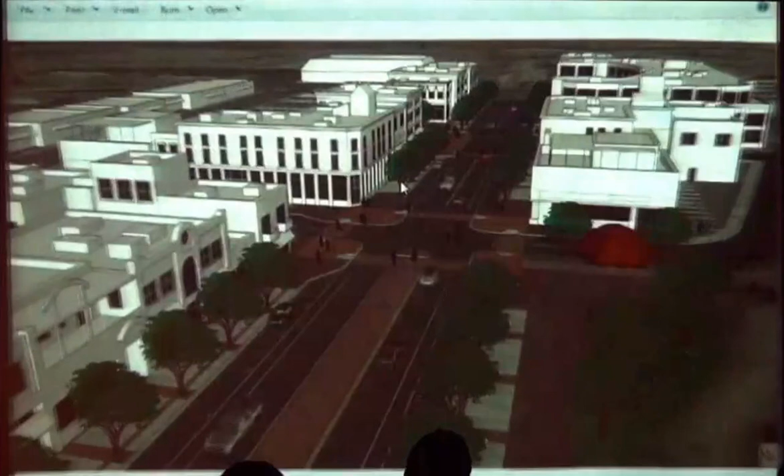Let's see if there's anything else here super relevant. Urban designy. Here are some different build-out scenarios in Tennessee. Here's trying to create a downtown core. Really, really simple graphics go a long way.

Finding your own graphic style is really important. You guys will become very intimate with the 3D warehouse in the not too distant future, and there's a lot of crap. You have to start to grab it and make your own library of parts that you like.

For example, none of these buildings existed. I stole all of these buildings, I think, from the 3D warehouse, but then I removed their textures, cleaned them up so that I could have this crisp graphic style for this. It wasn't about the buildings, it was about the arrangement of all of this stuff.

Maybe lastly - that one I think is not going to work. Anyway, that's probably enough.

Go ahead. How do you exactly navigate 3D warehouse? Because I was looking on it, but it's kind of overwhelming. So like, for example, when you had all those buildings, what did you exactly type into search?

When you're in search mode for stuff - trees, cars, buildings, whatever - use the web interface, don't do it via inside SketchUp. It's easier to just download stuff from there and then go back through it and clean it up. For the buildings, a mixed use building goes a long way, and you just have to be patient. There is a lot of stuff, and unfortunately people keep uploading more and more useless stuff every day.

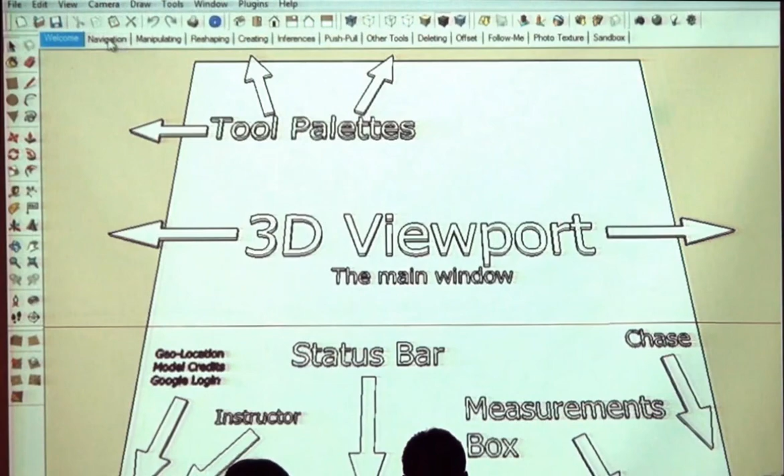So let's see, we're going to start to go through, and then obviously the menu bars at the top. We'll go through these sort of as needed, but they're pretty well organized. File is pretty basic stuff, printing and saving. Edit: cut, copy, paste, some hiding stuff. Views, generally kind of your graphic style. Camera stuff, drawing, editing, and then Windows.

We'll go through this a lot, but Windows is where—right there, where is it—Instructor lives in here. All of these little tiny tool palettes, like your materials, all of these things live there. So if a window looks sort of like this and you lost it somewhere, underneath Window is where they all live. And then Plugins and Help.

I know it's slightly different on the Mac and the PC, and I took some notes because they're actually really similar. The biggest difference is when I say Alt, Macs think Command, and Control equals Option. It's really consistent, but I don't have a Mac, and I'm not going to remember that stuff, but I will talk about it. Whenever you hold down a modifier key like Control or Alt, your cursor always changes to reflect it.

I couldn't even tell you what the modifier keys do, mostly because it's probably ingrained in my brain, but also because I just watch the cursor. I just hold down a couple different ones until I get the right cursor. Like if you're trying to select more stuff, you hold down the Shift key and your select cursor gets a little plus minus next to it. So it's really intuitive. Once again, don't write it down. Just remember that some of those modifier keys change your cursor icon, and it will tell you exactly what you need to know.

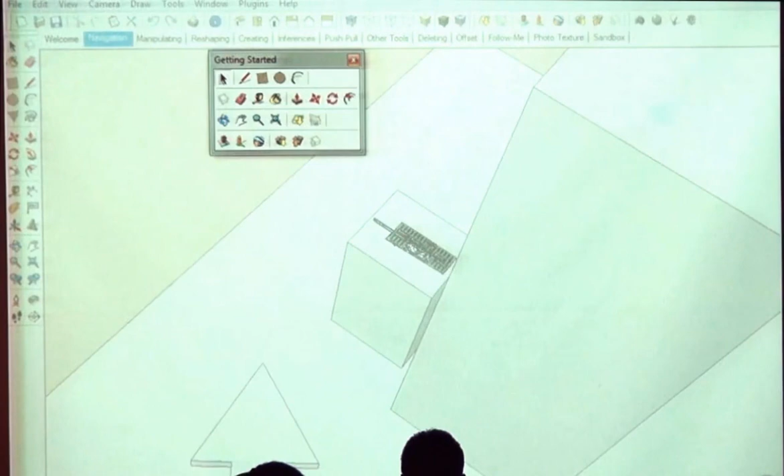Yeah, that's really awkward. SketchUp does crash. It's better than some things, I would say, in this world. We can talk later about auto-saving and backing up and stuff. Remind me. Yeah, okay, that's great.

So did everyone find that? Large tool set, just so that this is the full palette. And I'll turn off this other stuff so that we don't have to, styles. Okay, and that one's gone too, that sandbox.

Okay, so if you click, and then these guys, we haven't talked about that either. These are these scene tabs, and I set these up. We'll talk about them more in depth later, but right now these are chapters for this conversation, okay?

So if you guys all get to navigation, here is the magic. And I'm sure there's lots of non-mice in this room because you're on your lap, on a laptop, I get it, it's going to be difficult. First I'll just talk about the tools and I'll talk about why the mouse is so important. So those view tools live right here. They're this set of blue stuff.

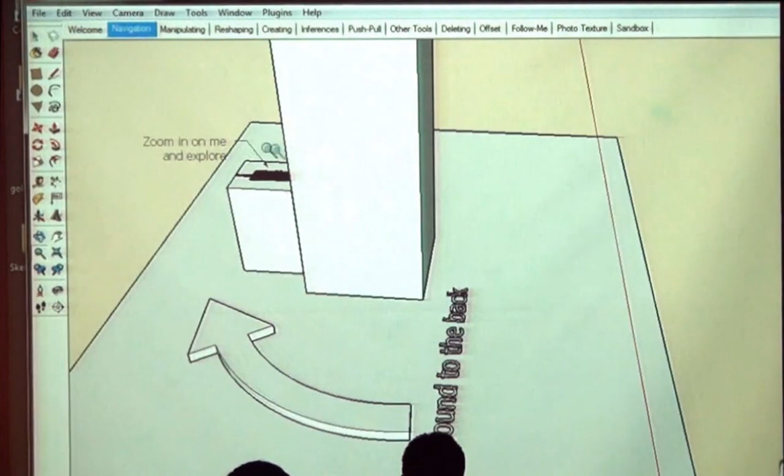The hand tool next to it, pan. H lets you pan. And lastly, the zoom, Z. The little magnifying glass, if you click and drag up and down, it zooms you in and out. So try to navigate yourself in back here, zoom in on me and explore.

For those of you with a mouse, it's all about your middle mouse button. Regardless of what tool you have, your middle mouse button, if you hold down the scroll wheel, turns your cursor into the orbit tool. If you scroll, it zooms you in and out. And if you hold down Shift and the middle mouse button, you get the pan tool. So just with the middle mouse button, you can do all three of those, basically. So try to get in here and move, just try to zoom down the street. Try to move through this little urban design-y project.

Am I killing you? Is everyone in the room really comfortable doing this already?

Okay, fair enough. Manipulating - you can just click on the scene tab and we'll get in here. So I have some cars, and these are all groups. We're going to first talk about just making things simple and being able to select and move groups.

Select tool, shortcut is the space bar. If you select something like this red car, you can then choose the move tool, which is this guy here, or press M to get it. Just try to move it around a couple spaces.

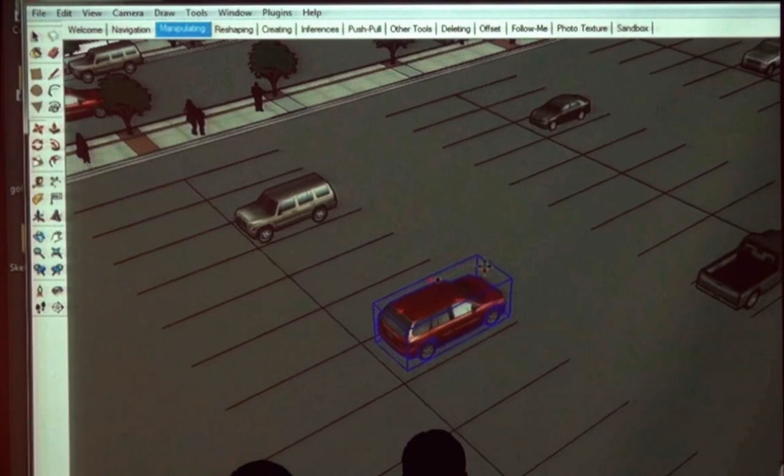One of the nice things about groups is if you have a group selected, you can easily rotate them with these little red crosshairs that pop up on its bounding box. Scale tool stretches it uniformly. Okay, you guys know this apparently.

Moving along - reshaping. As a rule of thumb, something I've learned over time, and I don't know if many other big SketchUp dorks would argue with me: it's generally easier to recreate something than to modify something. So if this is just an ungrouped blob of red stuff...

You can select faces and move these around as you like, but generally speaking, this is a really simple shape. It's easier just to delete some of the parts that aren't where you want them and just draw in new lines where you do.

Just kind of let that float at the back of your brain while you work on larger projects.

One of the things worth noting with this geometry that's loose, not in a group, is if you're trying to modify individual faces, sometimes if you're trying to move something and it won't move - like if I want to move this plane up along blue - I can't, even if I press the up arrow, well, I guess if I force it.

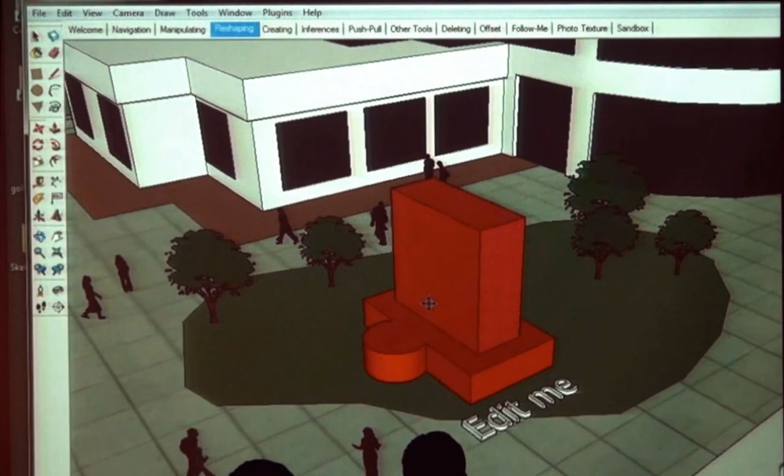You have to either press the up arrow to force lock my axes into the blue one, or do something called auto folding, which is Alt. If you look at the very bottom of your screen with the Move tool active, there's this 'Alt toggles auto folding.' What SketchUp's trying to do is if I'm trying to move this surface up, it would force a lot of other surfaces to get bent, to get folded, and SketchUp thinks, why would you want to do that? You've already modeled something nice.

Why are you trying to bend it? That's the trick - you have to force it into an axis with the arrow keys. For those who don't know, the arrow keys are a way of automatically snapping and locking your motion, your direction, into one of the red, green, or blue axes.

Okay, so manipulating - you know how to rotate. Everyone is comfortable rotating stuff. Hands - this is for you. Okay, there were enough, I guess.

Creating - so this is where I'm going to start to beat this stuff into your head, whether you like it or not. Now click on the Creating tab. I cannot harp on this enough: the most powerful thing, and sometimes frustrating thing, about SketchUp is the ability to snap intelligently, or to let SketchUp help you infer right angles generally.

So what I'd like you to do is make a cube from scratch. I gave you two edges of it, and I'd like you to go through the process of finishing the bottom part, so you have a flat plane, and then making it 3D, all by hand, not using push-pull. Then go up and make sure you're using those dotted inference lines.

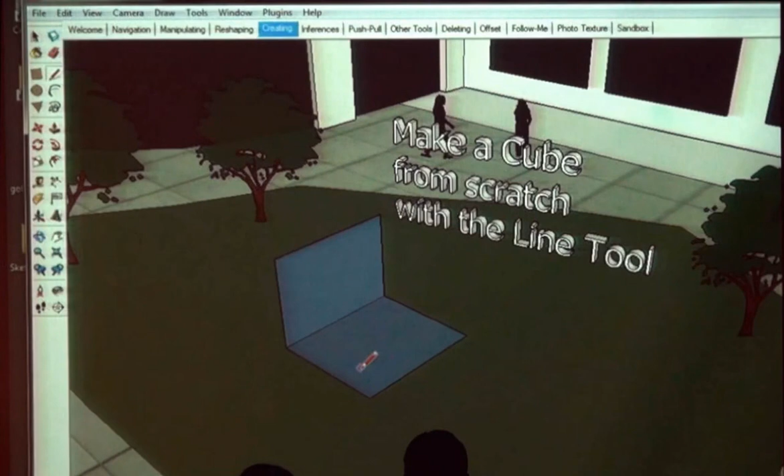There are a couple methods - okay, excellent question. There are a couple methods, and these are subtleties that relate to you as a user. If just using my mouse and the line tool, if I start making this line and it snaps to red, and I start moving it along red, it will automatically snap and put up that little dotted green line, showing that it's inferring that distance. The other part is the shift thing, and I use shift.

I don't do that - I don't have time to wait for SketchUp to figure out what it's locking to. What I do is, as soon as I get my line snap, as soon as it snaps to the red axis, I hold down shift - let me move that up here so you can see better in the back. It gets thick. When you hold down shift, that line gets thick, and it constrains it, which is the SketchUp lingo - it constrains it to the red axis.

So wherever I move my cursor, it's only going to be making that line along the red axis. The trick here is that if I move my cursor over the next endpoint I want to align with, I can force my current red line to be that same length, without thinking or waiting for SketchUp to do the little dotted things. So then I click on this endpoint and just close it in.

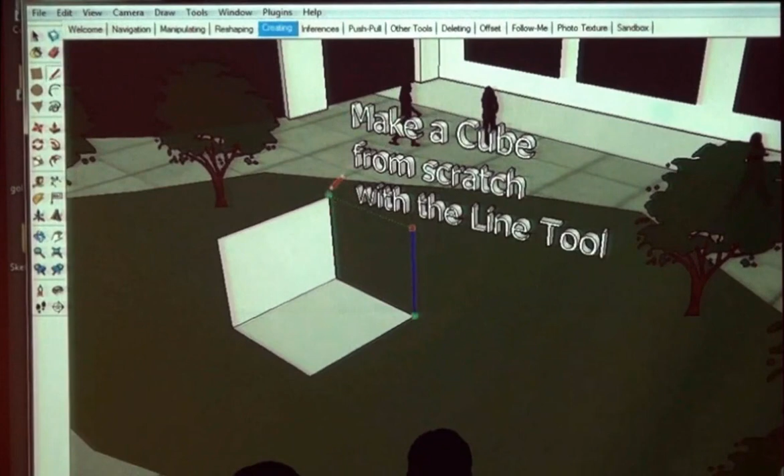So I start making a blue line, hold down shift, and then hover over this first vertical leg I made. Then click, let go of shift, and close it in. Click, find blue, hold down shift, hover over the point I want to align with, click, let go of shift. That's the way I would recommend it, but you don't actually have to use the shift key. SketchUp has gotten a lot better in version 8 about guessing without using shift.

So anyway, get yourselves a box made. The inference thing is so huge. Please raise your hand if this is not crystal clear. Okay, moving along.

I'm just not getting it lined up exactly. I should use this shift tool. The shift thing really helps. The biggest blight of SketchUp is when things are close and not quite right, because those subtle shifts are hard for us to see, but they make the model not work at all.

So if you're having issues, other people are too, so why don't you guys seriously make 10 cubes in this time until I get back up here.

There is no way I'm going to get in here, is there? Oh my gosh, I'm off by a whole row here. Okay, maybe this isn't going to work.

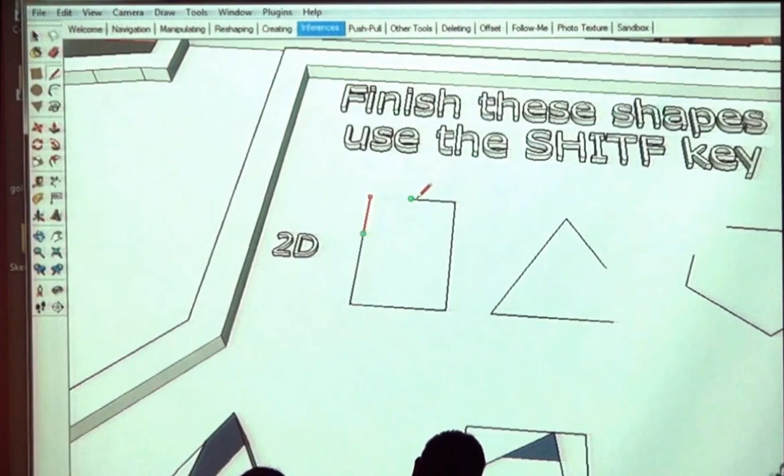For the triangle, someone just asked about parallel. There are a couple for the triangle. For the rectangle, it's easy because we're on red and green. For the triangle though, we have to find some magic point here in the middle where these two lines intersect, and here's how you go about it: magenta is the color that represents both parallel and perpendicular. They figure they're 90 degrees apart. You should be able to tell which one's which.

If you click on this endpoint, what I like to do is backtrack a little bit and hover over this line segment, and it usually says 'on edge.' At this point, you can try to extend out a line, and it should be magenta. Hold down Shift, then hover over the line segment, not the endpoint, somewhere on the line. If you hover over the endpoint, it'll try to make a right angle. Instead, hover over the line and say you want this line to intersect the other line. Then hover over it and click, let go of Shift, and click again. It doesn't look like it worked, but there it is, I did get closed in, it's just the other side showing.

Same with this one: endpoint, backtrack, magenta, hold down Shift, hover over the line segment. Then try these 3D shapes.

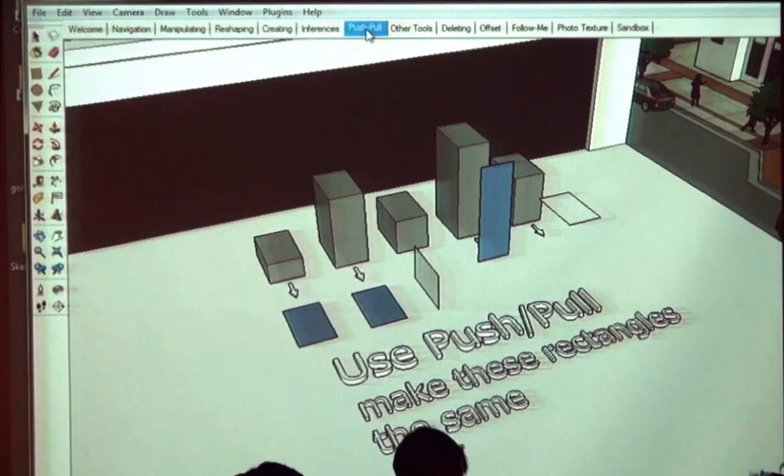So push-pull, of course you guys know this much about push-pull, that you use it to make flat faces into a three-dimensional shape. When you select it, P is the shortcut.

When you hover over a flat surface, it will auto-select it and hatch it for you. What I wanted you to do is just practice the same kind of thing, using the inference lingo, except you don't actually have to hold down Shift for this, which is nice, to make the same shaped cube using those starting points.

So this guy, if you click and then move your cursor over any of these endpoints or these lines, it will extrude it to the same height. Now it's just getting you comfortable using other geometry to influence the height and distance of the stuff you're building right now.

So then from left to right, front to back, I actually have no idea where I drew that because you can't really do anything. I guess you could use this one. That would work. Going down.

That was supposed to be pretty quick, but it's different, because there aren't any axes, pushing and pulling is a one-dimensional thing. You can only go one direction, perpendicular to that surface.

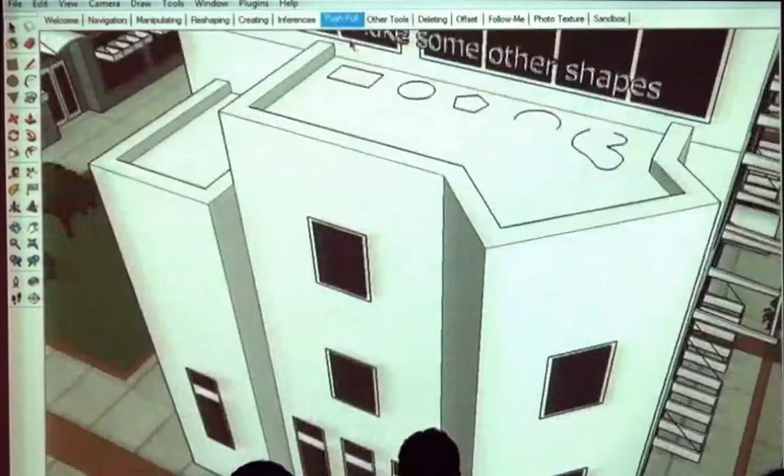Sorry, I lied. The one other thing I wanted to make you aware of, if you didn't know, is push-pull has one of its modifier keys, the control key. Once again, who cares what control is? Shift, Alt, Control—one of these is going to do something.

If I hold down—oops, P, I just freaked it out. The control key will toggle a little plus sign next to my cursor. And it will say at the bottom, Control, toggle, create new surface.

So what the little plus key with push-pull does is it leaves a division in there for you. It creates a new face rather than just moving that existing face. And this is useful for saving you from having to draw new lines generally.

Did that make sense? Oh, navigating, manipulating. Okay, other tools. Frankly, these are just time savers.

The arc is useful, I guess, because it's pretty hard to draw an arc segment by segment. But these make some other shapes, just these other guys here. Rectangle goes corner to corner. Circles are circles, they go center out. Sorry, for you CAD junkies, there's no 3-point circles or anything.

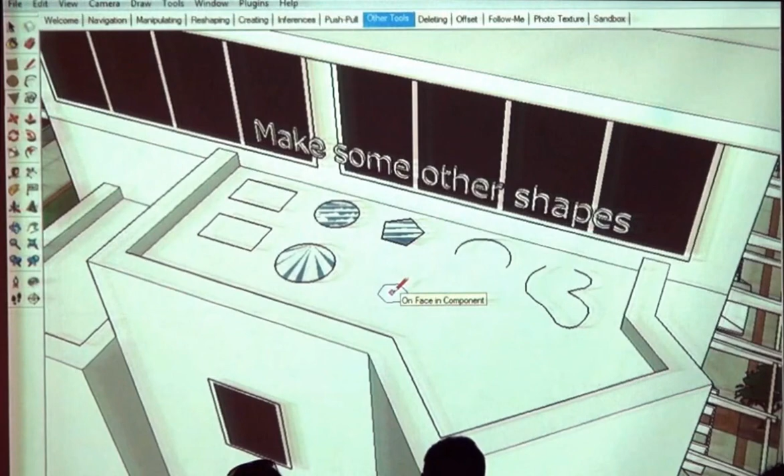Polygons, you can choose the sides. So the one thing you can do is as soon as you choose the tool, you can type in a number and hit enter, and it'll change the number of sides of this polygon. Right now it's on 6. I could type in a 3 and hit enter and make a triangle.

Arc tool: endpoint, endpoint, and the amount of deflection. And then freehand lets you draw freehand stuff. It's pretty tough to do anything really useful with the freehand tool other than trace contours.

It's not bad for sometimes you want really rough shapes or it doesn't matter and you're just doing it quick, but the freehand tool gets very little love from me. If I'm really making something that's semi-curvilinear, I'll just make a series of arcs if it matters.

Okay, questions? Moving along. Deleting—we haven't talked about selecting, and I just want to make sure that I cover all of the ways and the differences in the methods.

So if you single click on something, you get that face or that edge. If you double click, you'll get that face and all of its edges. Or if I double click on an edge, I'll get that edge and the faces it's separating. If I triple click, I can get all of the faces that are connected or touching it all.

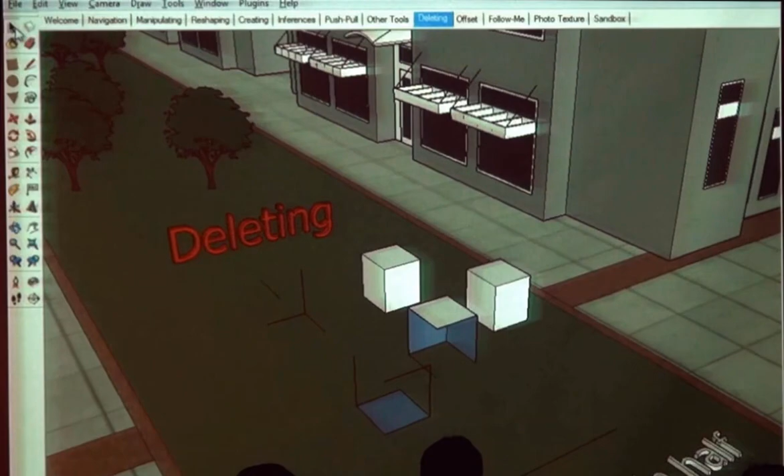Let's go to offset. Make a balcony - offset's really easy. It works pretty similar to push-pull. The shortcut is F for offset.

What about breaking a line? Good point, let's go back to deleting. One of the frustrating things is there's not a way to break a line in half - there's no break tool. The only way to make a line segment shorter is to connect a line maybe to the middle, snap to the midpoint (cyan), connect a line segment, then choose the eraser and erase the segments you don't want. There's no break tool, that's just how you have to do it, and it's not necessarily intuitive.

Okay, so offset - F is the offset tool. Is everyone familiar with offset? I heard one no, so there's probably a couple more. Offset works similar to push-pull in that it auto-selects whatever you hover over. If I choose F and hover over this plane, it'll hatch it, and it puts a little dot on the nearest edge to your cursor - that's going to be its reference point, indicating we're going to measure an offset distance from that point to your cursor. If you click, you can start to drag in from that location or out. In this case we want to go in.

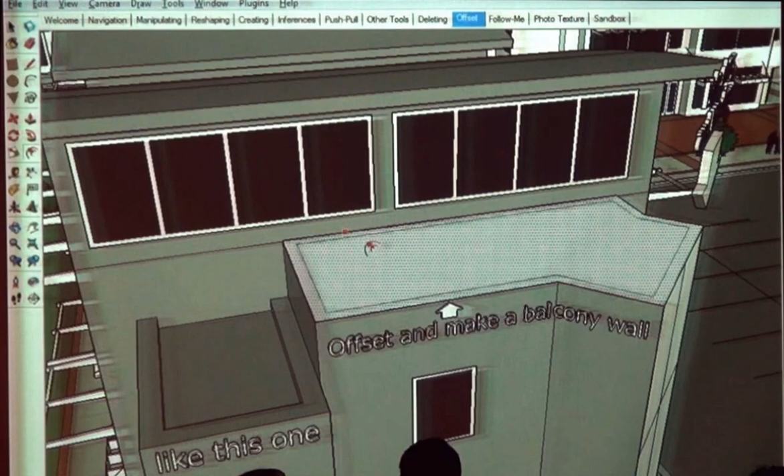Like with any of SketchUp's tools, do you know how to do specific distances yet? You just type a distance and hit enter midway through any operation. So in this case, we're going to offset this in, let's say, 2 feet - 2 apostrophe, enter. I think feet are the default unit. Then P for push-pull to either push this down or pull the other part up.

If we turn the corner here, we can make some doors and windows - this was a little exercise to use F to offset some different parts. One of the nice things with both push-pull and offset: if you double-click on a surface, it will repeat the last amount you just did, which is a huge time saver. If you're making building footprints popped up to 15 feet as context buildings, do one at 15 feet and then double-click on the rest, and they'll pop up to that same height. Same thing with offset.

How long is class, by the way? Typically till 9, but we can go later. Till 9? I'd say, I mean, I'm thinking half past 9:30. Oh okay, that's what I thought. Maybe another half an hour? No, I was expecting till 11. Oh wow, okay, anyway, we'll just keep going.

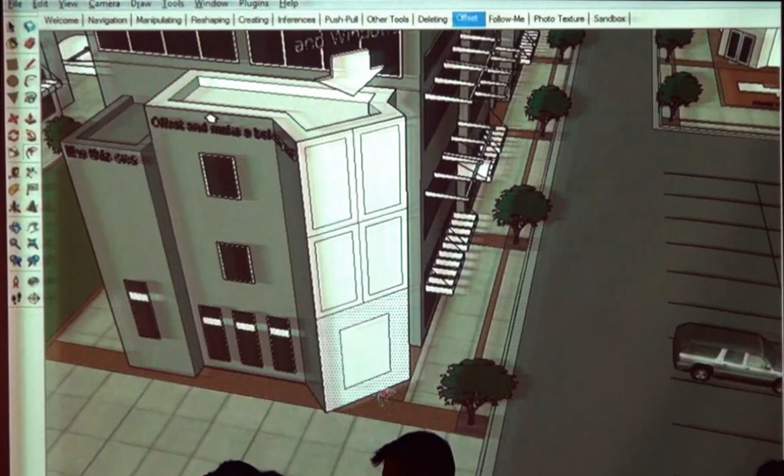Okay, offset and double-clicking all makes sense. Okay, so let's do the next one.

Follow me. Follow me is really sexy - what it does is let you sort of extrude, like use push-pull along a path. There are two methods. This is the follow-me button, double click, or excuse me, this one right here, right below push-pull.

So there are two ways. You can either select the Follow Me tool, click on what I would call your profile surface, the one that you're going to be pushing and pulling around, and then you can just drag it along a path.

You can do really sexy, complicated things like a planter without a lot of effort. This is important because it's literally impossible to join these arced parts at these 3D angles. It's a huge thing.

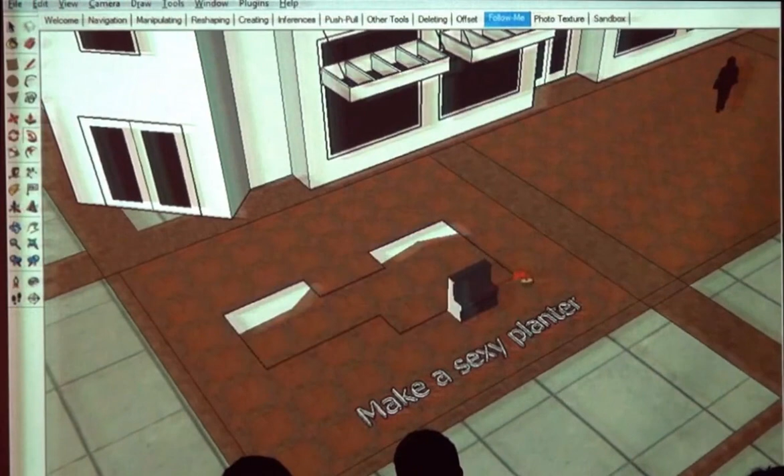Okay, so the click and drag method works, and you just kind of have to be patient with it. But this is not the recommended method to do it, because you end up fighting at the end, and then all of a sudden you are doing weird things like, what's this? How did I even get that? And you're never going to fix that.

So here is how you should do it. It's a 2-step thing. You select the path, and then you choose the Follow Me tool, and then you click on your profile. So if you double-click on this bottom part, on the base, on the path, and then deselect the surface, then you just have the edges. Then click on the Follow Me tool, and then click on the surface profile. It just does it for you.

When you did the windows, did you do it that way where you double-clicked to get the face and then deselected the face to get all 4 corners, or did you select each one? I did them individually. So what I did is I just offset this one and then double-clicked, and it repeated that same amount.

Because Follow Me is so sexy, you get it twice.

I got a question. How come sometimes the shapes turn blue and how come sometimes they turn white? Okay, great question.

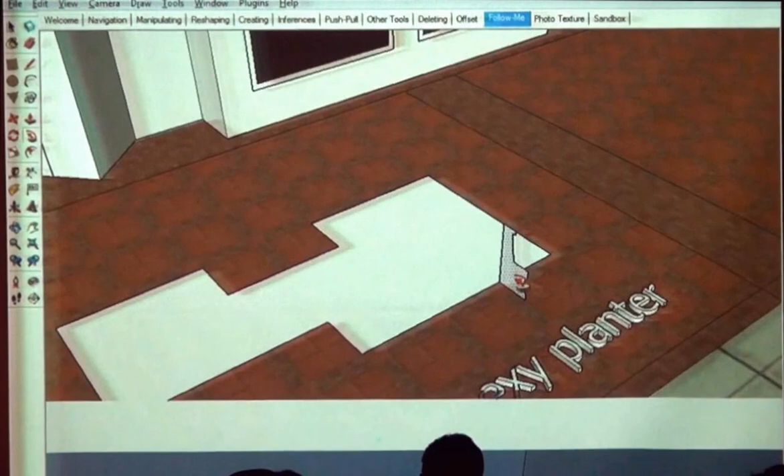Okay, so Follow Me again. So the path: you double click to select this whole surface, and then shift click to deselect the surface, so then you just have the outside path. Then choose the Follow Me tool, and click on the surface of that profile, and it will drag it around for you. Is there any way to combat that camera cutting off?

Yeah, and this didn't happen quite so much at home. This is an effect called frustum clipping, and it happens in geographically large models. Because this little tiny thing has all of this other junk around it, SketchUp needs to be able to think about all of this stuff and keep everything ordered when it renders it front to back. So what it does is it tries to cheat and push the first point you can see farther away from your nose.

The only way to solve it is to make your model not so geographically large. It's a proportional relationship to how big your model is and how close you're trying to get into something. It is, in my opinion, one of SketchUp's only real big flaws, that there's no way to manually control that.

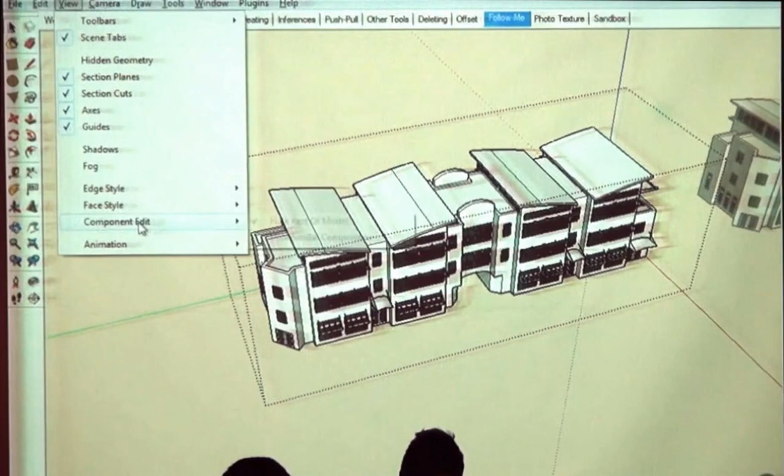Sometimes when it's really bad, if you go into a group and hide the rest of the model... where's hide at? Or show, where is it? View. Hide rest of model, and hide similar components. So you're just looking at this one individual group, and then go zoom extents, which is this button here. It'll kind of bring things back and clean up that relationship a little bit.

So then when you go back out into the real world, you can sometimes get in a little bit closer, but it's a drawback, it really is. When you're doing big landscape projects and you maybe want to have some views of the mountains in the background, don't bring them in from Google Earth, because it will definitely compromise your ability to get in close for the stuff that matters. You're going to have to fake it, put in some kind of wallpaper in the background or something.

Okay, did Follow Me work out? Okay, photo texturing. So let me quickly go through this before the rubber meets the road here and make sure I haven't omitted anything huge.

Okay, last thing, let's go back to Follow Me. I do want to talk about groups and components. So in this model, in general, I have a few things - I built this for a project, so it's okay, it was a little quick. Groups and components - the difference between groups and components. You've heard both these terms, I assume, or at least heard of them.

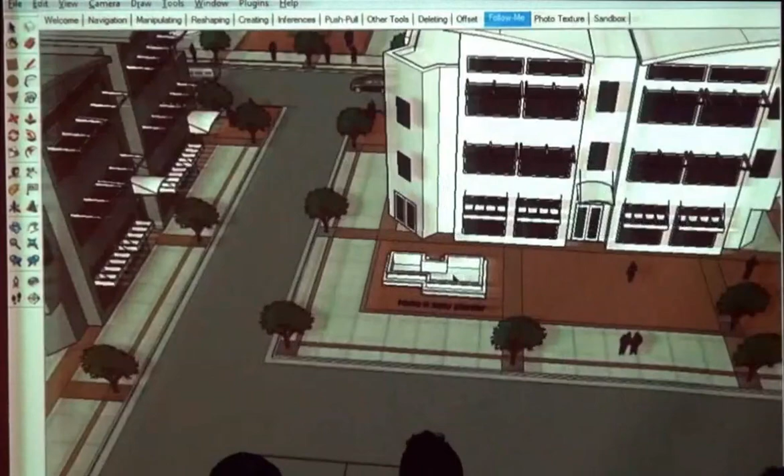So let's talk about making a group. Let's go back to our planter and pull that up. Oh, this effect here - just so you have a word for it, it's called Z-fighting. This plane of the bottom of the planter is in the exact same place as this ground plane, and SketchUp just can't decide which one to draw first. Anyway, let's pull that up.

To make a group, since there's nothing else attached to our planter, we can just triple click on it or drag one big bounding box around it, then right click - let me move this up a little bit. Right click, and there are two options: make group and make component. They look a little bit better this way. If you choose make group, you're done. It puts a little bounding box around it, and you can interact with it as one big whole part. All you have to do is single click on it.

To edit groups, let's say you need to put more or less dirt in this planter. You can double click on it - that's the easiest way by far. Then you get inside, and you can actually manipulate the individual parts of it. Then either hit escape if you're zoomed in really close, or just click outside the dotted bounding lines, and you'll go back out to normal space. Is that all crystal clear?

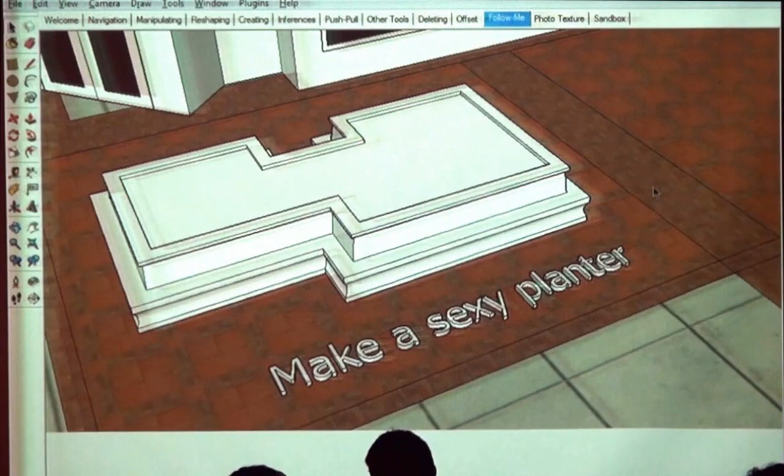Groups are easy, and you can have groups within groups within groups, and it keeps the hierarchy. It's the way you should model everything - the way you should organize your model. I typically have only one thing ungrouped at a time, the one thing I'm working on. As soon as I finish it, I group it and move on to something else. I cannot harp on that enough.

Okay, let me undo so we get back here to its ungrouped state. Let's pretend now that we know we're going to have a whole bunch of planters, and they're going to be identical to this one. Maybe we don't know exactly what the materials are going to be yet, but we know at least the locations of them, so we can use this as kind of a placeholder to be thinking about it. On the back end, when we do know what materials this is going to have, we can just do it to one single model, and it'll replicate those changes everywhere.

So once again, triple click on it to get it all selected - make sure it's not a group anymore if you undo a couple times. Right click, and right next to it is make component. This is the defining part that's a little bit different - you get this window to pop up. We're going to ignore some of this stuff for now. The only thing that's really important is that this bottom box is checked: replace selection with component. You can give it a name, and it's a good idea to name this stuff - it'll help you find things that are lost later on. Planter.

And then hit create. Same thing, it's a group, you move it around, it looks and feels and walks like a group. You double click to get into it. But here's where the magic is.

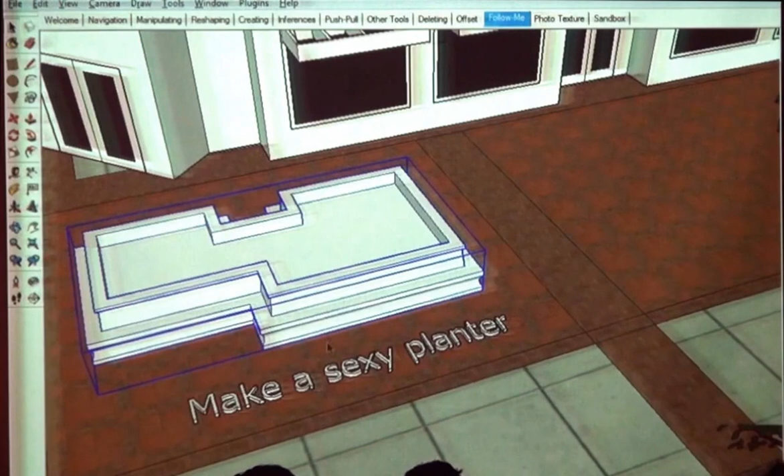So here's how you do it. You have your group selected. Choose your move tool, M, modifier key. At the bottom you can see it'll say Control equals toggle copy. Who cares what button it is? I'm going to press the modifier keys until I figure out which one it is. You get a little plus next to your move icon. Now you're in not just move mode, you're in copy mode.

And if you use it just like you would, I'm going to slide it over here along the green axis. This is how you make a copy. This is, in fact, the only way you should make copies. You should not use copy and paste. Copying and pasting has its place in SketchUp, but it's not for this, it's not for duplicating.

And if you hold down Shift, it'll slide it along like a red or green axis, it'll lock it in exactly the same way. So you start the copy with Control, then you find your axis, and then hold down Shift.

Yeah, so let me guess, so you did this, and then there you go, this is where you got. So you just have to find one of those axes, is all.

Or better in this case, if I were to select this, move, copy, if I were to grab one of these, snap to one of these points at the bottom, then I would be dragging around the bottom point, and it would then snap to the ground plane.

Okay, alright, I was actually found out this morning. Can you use this tool then to array? Yes, I didn't want to go there, but we can talk about arrays. It's just a huge time sink. So arrays are cool, so here's the magic.

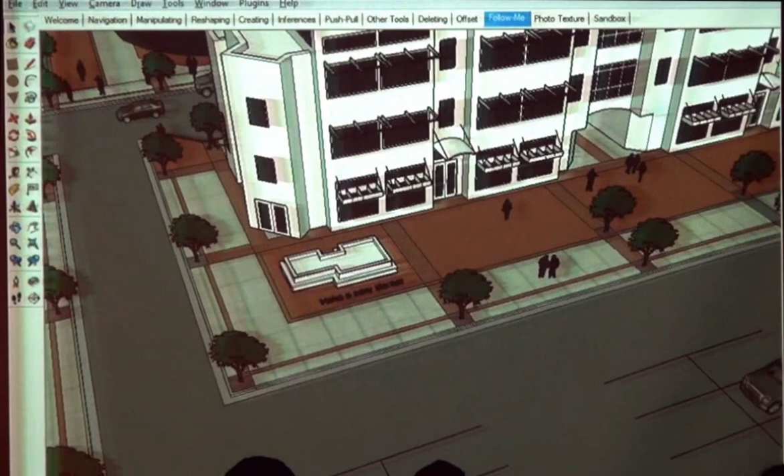So here we have, in fact, let's grab a tree. Here's the copy and paste thing. Copying and pasting is good to move an object from inside a group to outside of a group, or from inside one SketchUp model to another. That's its use. So I'm going to copy this tree, and then come out here and paste it. Okay, so I have this tree. You guys could use the planter or whatever, I just grabbed the tree.

So let me talk about this in concept first. Hear my words, watch my motions, and then we'll walk through it, because it's going to take us 3 iterations to get it, just because there's a lot of button pushing at specific times.

So I have a tree selected. I grab my move tool, and I make one copy, just like we talked about doing before. Then I do some keystroking. I press the asterisk key, which is Shift 8, and then a number. So asterisk 5, and then hit enter. And what it does is it repeats that same offset, in this case 4 more times. It counts the first one.

Okay, so let's step through this. Grab your planter or your tree or whatever you just made, so you have it selected. Choose your move tool, M, and make one copy. I'm going to press the control key to get my little plus. I'm going to click, and drag, and then click again, and I've finished my copy. My new tree is selected.

It's done, we've completed that operation. But before you rotate your view or do anything else or change tools, you need to then type asterisk and a number and hit enter. So asterisk 6, enter.

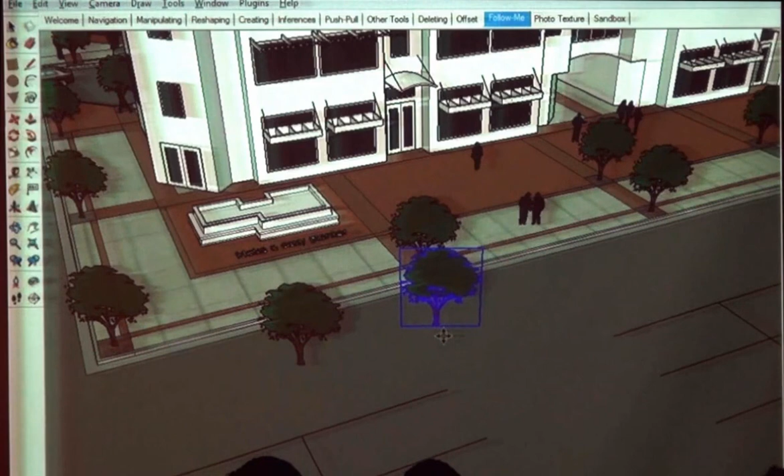Okay, 10 more of you got it. So, undo, well, I'll step through this again. Select my tree, choose my move tool, toggle on copy mode. Click, move it over, and click again. I've finished copying. Then type in Shift 8 for the asterisk and a number, and then enter.

Don't type 10,000, you'll crash SketchUp. It'll try - it will, and every time it crashes SketchUp, or brings it to its knees, and you have to wait 10 minutes. Okay, one more time.

Select your first shape, move tool, toggle on copy mode, click, drag, and click so you've finished the copy. Then type in asterisk. You do not need to click in that little measurement bar at the bottom. If that hasn't been said before, you never need to click there. Numbers you type automatically go there. So asterisk 5, and then press enter.

So the concept is make a copy, then type in the asterisk and some number. There's a converse of this where you don't know, you just want to evenly space some things. So I have no idea what these tree offsets here are, for example. I don't know the distance amount, but if I make a copy to the far location, instead of using the asterisk, I use the divide by, the forward slash, the one with the question mark, forward slash, I think it's 4.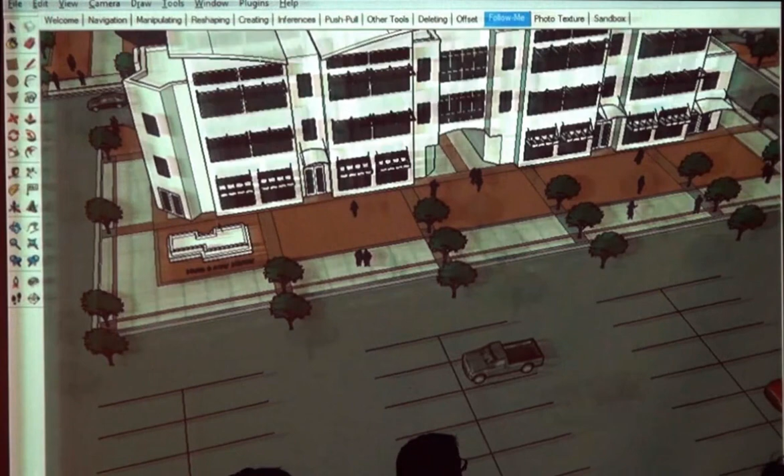At the end of this, there's a couple of links I can maybe point you towards. Okay, so copying in arrays, groups. Oh, did I finish that? We got sidetracked on the groups thing. So if you make it, did we do this? You make a group, and then you can go into either one of these and edit it. So if I go into this one, and if we go into this one, we'll paint on, we'll make some gray dirt because it's in these days.

It's chic. It does both. And it would not have done that if there were groups.

The one thing that's tough to distinguish in this universe is what's a group and what's a component. I have tons of things in here. Is this a group or is this a component? Are these trees groups or components? This building looks just like this one. Maybe they're different. Maybe they're, who knows?

The one way that I know to find out easily is if you right-click on something, anything on the background even, you get what's called the contextual menu. The very top thing is called entity info, and if you select something, it'll tell you info about that entity. So this building is a group. This planter I just made is a group, and it'll tell you how many there are and its name. These trees, it turns out, are components also. These cars, on the other hand, are actually groups, and it says that.

So that's the quickest thing. And this, once again, if your right click doesn't work because you're crazy, underneath window, same thing, entity info. Okay.

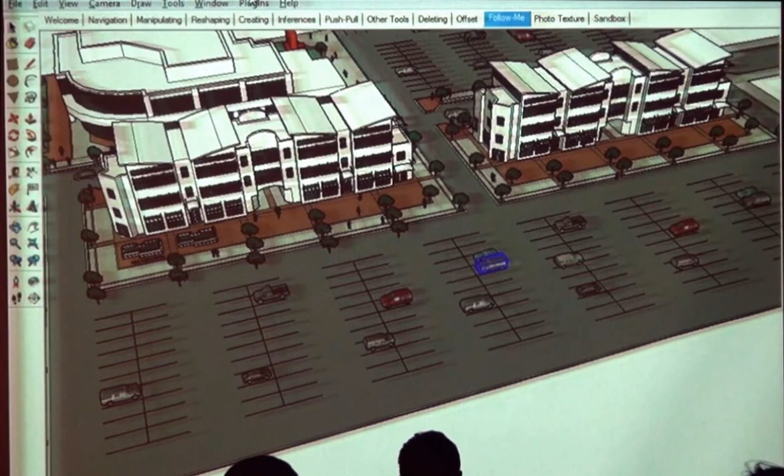So just quickly about windows - if you go underneath Window, you will find Components, and in here there's a pull-down menu with a whole bunch of options, like landscape architecture. If you're online, it'll pull this stuff out of the 3D Warehouse.

You can pull in little doors and people - it's just silly to build this kind of reference material when you can find it. Once again, I'll come back to the 3D Warehouse in more depth a little later.

Okay, so let's move on to photo texture. We're going to definitely shift gears and get into maybe the more fun stuff, more visually appealing stuff. So far, do you have any questions?

Okay, so here is - I brought in, I think this is the project site you guys are going to be working on, right? The gardens. And I traced off the air photo pretty crudely, these pair of greenhouses.

So the goal here is, also in that zip file I have 3 greenhouse textures or images that are going to become textures. We're going to bring these in, stretch them to this surface so that we can photo map our building.

No, these are ones Jay sent me. They're actually of that greenhouse.

One of the things - this is a good caveat - Jay sent me these right from his camera. They were like 5 megs a pop. Insane, insane - if you start to do that for a whole bunch of buildings, you will develop an insanely huge file quickly. I scaled these down.

Remember this number, 1024. It's a little abstract, it's a power of 2. It's a good texture size that you should think of as your maximum width and height. Don't bring in textures bigger than that unless it's going to be one of a kind, like your base map. For buildings, people, cars, and trees, 1024 is your absolute maximum, and you should generally make things smaller than that. That is your rule of thumb - 1024 pixels, sorry.

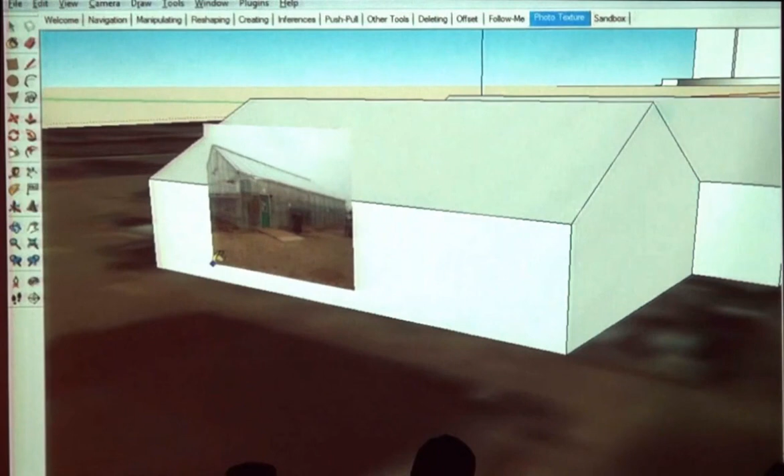We're just going to click - don't try to fill up the space. In fact, it would be better if you kind of intentionally leave it small. Don't use the endpoints - this sounds silly, but just do it right in the middle of the surface. So I'm going to click here and maybe click here, and I get this repeating bad photo on here.

File import, image. Make sure that you have the file type selected so you can see it, and then use as texture. If you bring it in and it's not repeating, it's because you didn't listen and you chose as image.

Does everyone have this? This next step definitely builds on this one. Okay, so now what we need to do is think about it. We already eyeballed the size and shape of these greenhouses pretty bluntly, so they're probably close-ish. But we already have this geometry defined, and we believe this is the right size for this wall of the building. What we now want to do is stretch this texture out.

Right-click. And this contextual menu, let me move it up, it's at the bottom here. Right-click, texture, position. It's a little buried. Right-click, texture, position.

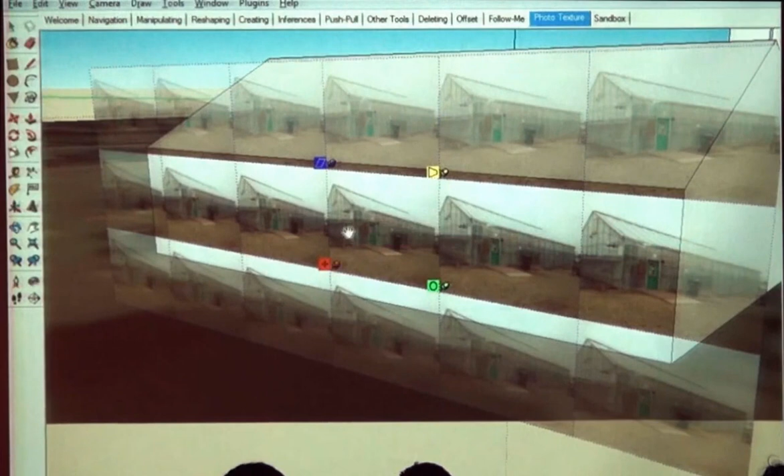Right-click on one of the pins—or actually, you don't even need to click on a pin. Right-click on the surface of the image and uncheck fixed pins so that they're all the same color. You want unfixed pins.

Okay, I'm going to move ahead here and do this so you understand the process, and then we're going to step back through it. So the concept is that I'm going to pick up these pins. Oh my goodness, this is going to be a little tricky.

Okay, change of plans. We can't get in there close enough. Let's see, this is a great opportunity. Undo—where did everything go?

Hit escape so you get back out. And if you lost the image like I did for some reason, let's re-import that on there. Yes, I do call shenanigans. Okay, so we have it on there.

Because this is a geographically large model, you're going to have this problem in the future. We need to get in here a little bit closer than that frustum nightmare lets us. There's one trick to do it.

Temporarily, I guess, to let us get in there and not have that issue—it's to change our camera from perspective to parallel projection. So at any given time, underneath camera, one of these three things needs to be selected. If you just choose parallel projection, it'll switch you to it. And at this point, who knows what's going on?

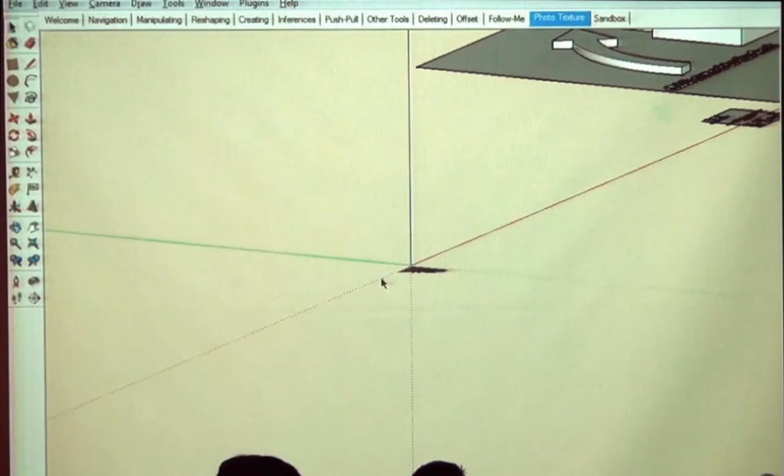I can see that part of my model is getting clipped off. We need to hit the zoom extents button underneath the hand. Zoom extents, okay, and then zoom—you have to zoom back in here by hand, I think. But now we can get in here super tight.

That's one of the nice things about parallel projection—it doesn't have that clipping issue, but you're also forced to not be in perspective, which looks a little bit weird for some views. Parallel projection—did everyone get that? So: camera, parallel projection, and then zoom extents. You need to probably do zoom extents after that.

You should just re-import it. I lost mine—I think when I canceled out of that operation. Okay, so... not yet. I like the blunt. I like the bluntness.

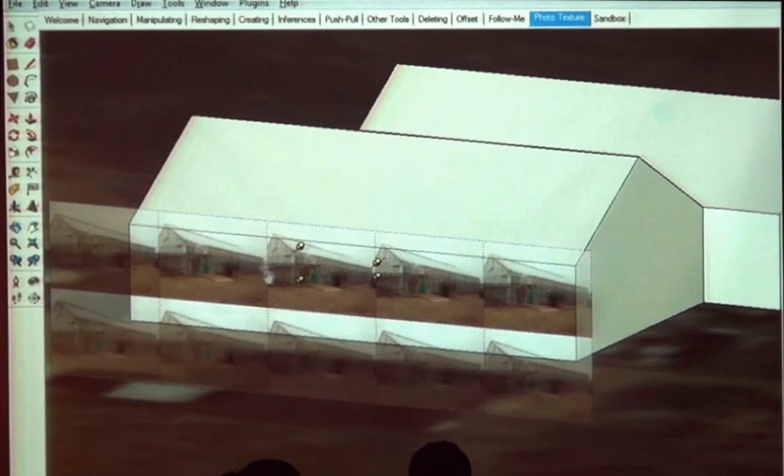So after I've placed them, and they need to be unfixed—they need to be the same color, all one color, quit doing that—then I can actually stretch these out to the corners of my building and hit enter. And instant texture, okay? So let me undo.

Right-click, texture, position. So two steps: one, you want to position your pins on the image, and you zoom in there, get in there good and tight. To do that, you click, you tap on a pin, it gets in your hand, then you zoom in and tap again so you don't click and drag. You click, move, and click again to position them on the image.

After you've done all four, then you click and drag to stretch those pins to the corners of your building.

The colored ones are too, but they do different things. My pins are staying at the edge of the image every time, like they're not getting to the edge of the building, even though they're not checked as fixed.

I think you click, let go. You have to really zoom in. Okay, yeah. So you click to pick it up, and then you click again to place it, and then after you've done all four of them, you click and drag to stretch that.

My right click doesn't work. Is there any way I could do it without that? As a Mac user, I think you can control click still. Oh okay, so I have all these color pins, but I don't think they're right. So right click and do that.

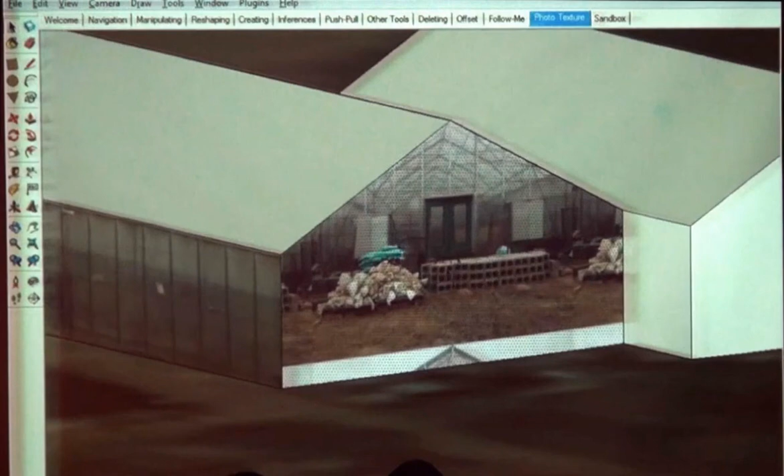You can also right click in that process to hit accept. So do another side. So if we do the front, file, import, greenhouse front as a texture, stretch it out generally. Texture, position - this one's a little trickier, you're gonna have to kind of guess where some of the corners are.

What if you need more than four points? You're SOL. Is it possible just to cut off the roof and make it a separate piece? Yes, you can. I mean, it's just textures.

So what I'm doing here is I chose these four points. You could have chose the roof as one of those four points. Maybe I could do this instead, so those could be my four points.

So what I could do, so I've placed this on there, and for whatever reason you want the roof to be different, we could just divide this surface using the line tool, and then stretch, texture, position just this top part. Maybe it needs a door on it too, so you can do that. Because I've divided that surface, you can work with those two - you can retexture that other surface differently.

Can you do textures for curved surfaces? Yes, we will talk about that. The short answer is textures for curved surfaces are difficult and cumbersome, and there's semi-advanced tools in other 3D modeling programs to handle these very specifically. SketchUp does its best.

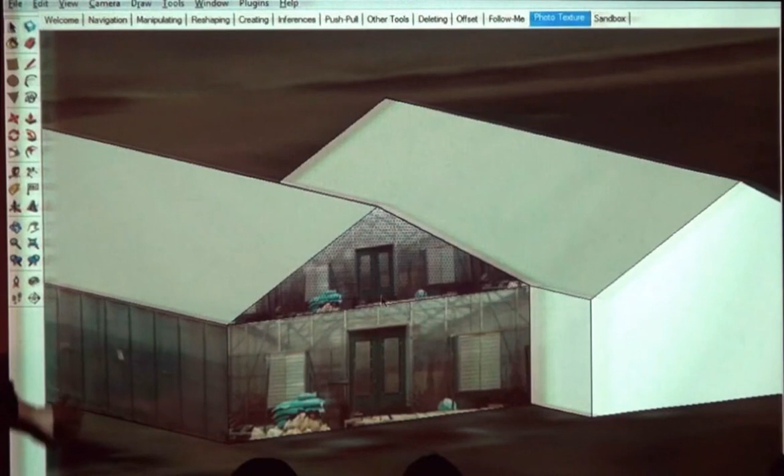Even this side that was at a pretty steep angle really isn't that bad. Even the pixels that are on the far side really aren't that bad. So some perspective just doesn't hurt.

One of the things that's nice is if you have a perspective of a corner of a building, if you texture this one side and then suck up that texture and put it on this side, it'll automatically have the edge it shares in common already positioned correctly. So it's a little bit of a shortcut if you're really frantic - I don't know, it's only going to save you like 30 seconds, but.

Is there a way to copy and paste the textures? Okay yeah. Do we need to talk a little bit more generally about textures? Because this is just one specific method of not repeating.

Let's back up here. So this is a flat plane - I did bring this in from Google Earth, but it's just one big flat plane. Let's make a box.

B is the default shortcut for the paint bucket, and when you choose it, you should get this materials box. On the Mac it's a little bit different, and it's been a while since I've done SketchUp on the Mac, so I'll come around and if you guys are really lost, I'll help you. But the concepts are the same.

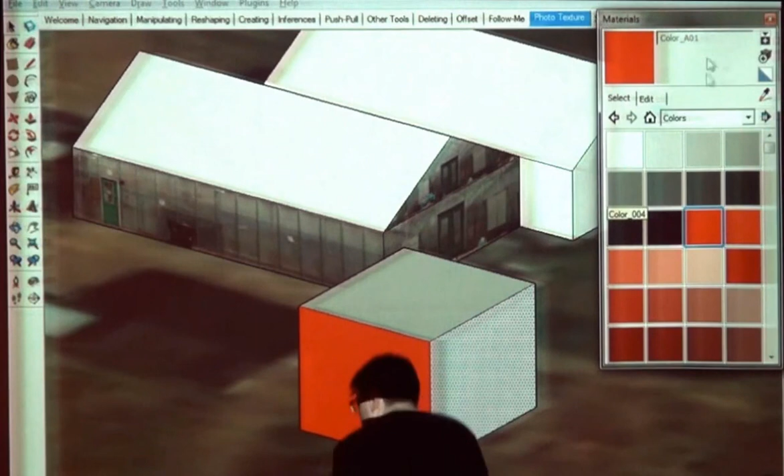So if we go back to colors, if I want to do this red, you click here and your active material pops up in this location - this is indicating where your active one is. If you want to untexture something, you can't really have no material, every surface has a material. If you want to apply the default material, the whitish purple stuff, there's a button for that right here. So that is essentially untexturing, I guess.

So red, okay, now this is closed - I don't know where this red is, I've lost it. I really want this red now to go on this side, and I've chosen a different material. The way to suck that material up, just like you would in Photoshop, you use the eyedropper. There is no eyedropper tool, and it's really disappointing that it's actually not even down here.

There is a modifier key - on the PC it's the Alt key, turns it into an eyedropper. There's an eyedropper in materials. On the Mac? No - oh there it is. Good call, and it's command. Command, there you go, so that's how. So the eyedropper will make your active material whatever you just clicked on, so then you can place your red wherever you would like.

Let's talk about some of these. So you can bring in, just the same way we brought in these textures and stretch them, you can bring in repeating textures. So if we go into the library and choose something like brick, same thing - I just click here and I get some brick. But let's say I think this brick is too small, the individual bricks are too tiny. I want huge bricks, like for a retaining wall.

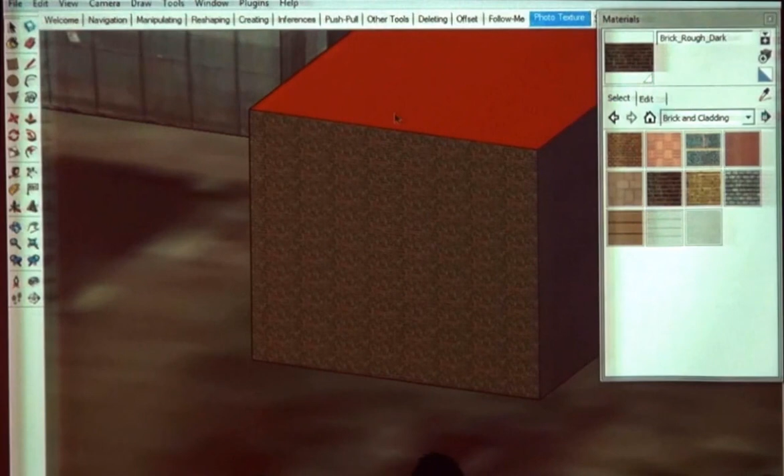There are a couple methods. I have this brick still active. If I choose the Edit tab, I can change its size right here. So if I want that whole image to get stretched, let's say 3 times, I can just type in 9 feet, and it gets bigger. And that's weird, that works. I actually never do that, ever.

If I want to stretch a texture, what's nice is that did it for everything. But usually I'm a little more visual, and I don't know, because this image has 5.5 bricks across the top, and I don't want to do that math. Math sucks.

If I right click, I can do the same thing. Right click, texture, position. But instead of using the unfixed ones, if I right click and make them fixed, the fixed ones do some different stuff. So the red one, if I click and drag it around, it just basically pans that image, it offsets it. The green one scales it uniformly, which is what, in this case, what I would be trying to do. It also rotates it. Then the blue one will stretch it vertically and then does some shearing.

And the yellow one, if you ever find a real useful use for the yellow one, give me a call, tell me that that's going to be useful to you. It's just insane, but it helps round out the process there.

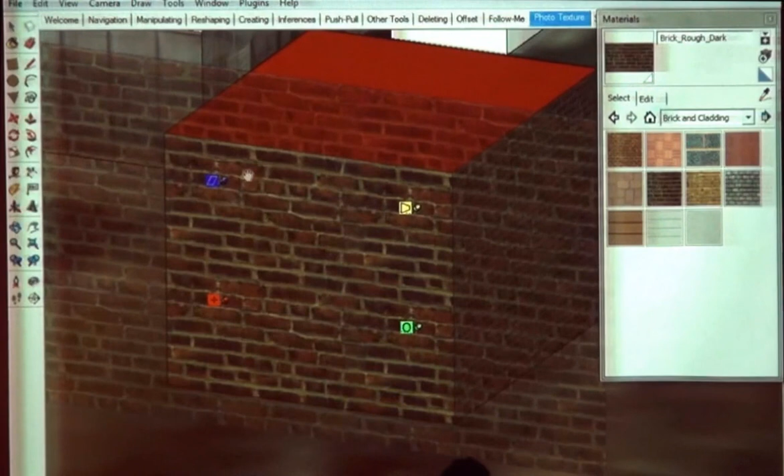So that's how I stretch out this texture. Now, if I hit enter to keep those changes, I only really made those changes to this one surface for this particular material. If I want to replicate those changes, I have to suck this texture back up, because these are, believe it or not, 2 different textures. It's not just the image, it's also the scaling relationship of it also. So if I suck this up and then paint it onto this side, I get those larger bricks. Did that all make sense?

Should I start asking these negatively? Did that not make sense?

Okay, so it's the exact same process. So if I brought in, I am sure I can find a material, I'll just do it to show you. Import. Oh goodness, computer, data, 3D resources, textures, brick. How about you? As a texture, same thing.

I just click and click, get it on there, and then I'm going to make sure I resize the texture position, and then maybe I'll drag it to the corner, and maybe it needs to be that big, and then enter.

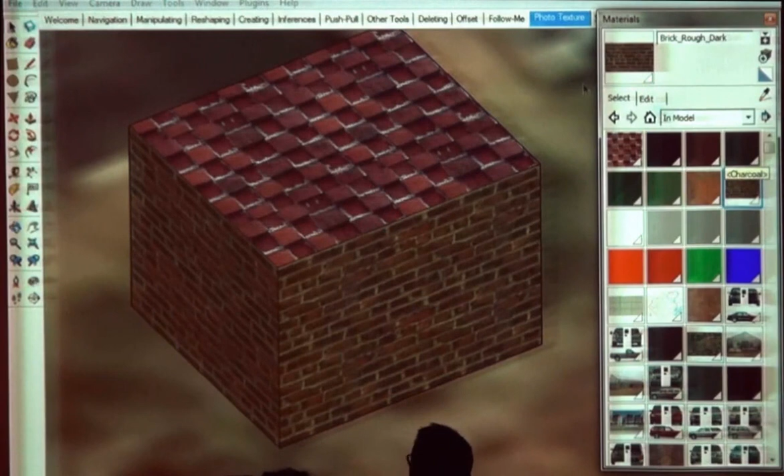And there it is. If I want to find it, there's select edit, and then really there's this home button, hopefully you Mac guys can find it. The home button shows you all of the materials that are used currently in your model. This one's not selected, let me eyedropper it. So there it is, brick. In fact, it's the very first one, they are in alphabetical order, I believe.

One of the things that happens a lot is your model starts to get too big, and maybe you need to clean out some materials that you're not using. There are two methods to doing it, and this is worth noting. If you go to Window, Model Info, the very top one, there's all kinds of cool stuff in here, and hopefully we'll have time to cover some of it.

If you choose Statistics over here on the left, there's something called Purge Unused. It's just like for your AutoCAD junkies, the same thing as Purge. If it's not being used, it's going to delete unused layers, unused materials, unused components. You can have a definition of a component, just like you have a definition of a material, but not actually have it in your model anywhere, and it would delete it too. So if I purge unused, a couple of these shift, and next time you save it, your file will get a little smaller, hopefully.

The other thing is, if I need to get rid of stuff and I'm using all these materials, so I know I'm using these two types of brick, maybe I just won't have brick in this model, I'll just let those faces be red or whatever. You can right-click on one of these and choose delete, and it'll give you this box that says, hey, this is being used, we're going to replace it with the default material. Is that right? Yeah, so it goes white and it goes away. Same thing here, delete this, and then it goes away.

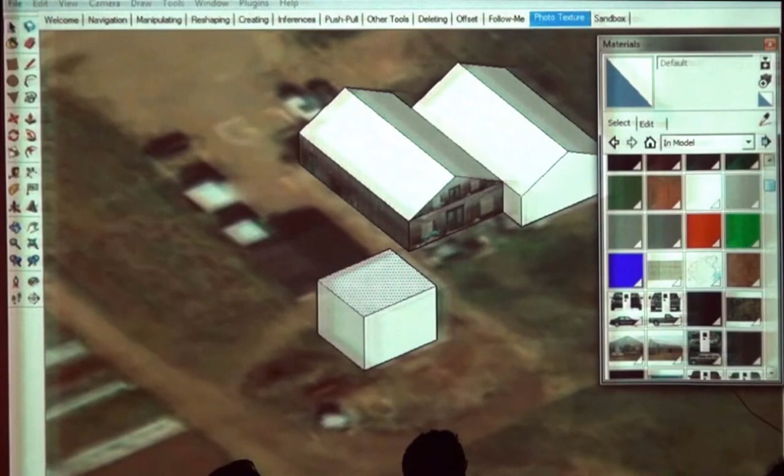It's quicker for SketchUp to render one image, one JPEG, with those 3 different sides than it would be for 3 smaller JPEGs applied in the same way. So if this was one 1024 by 1024 image instead of 4 512 by 512, that's uber 3D programming insanity. But okay, this is pretty advanced. You don't need to try to get to that level. Doing it this way should be enough as long as you scale down those textures.

Texturing, stretching them, repeating.

One sexy thing that the colors let us do, and this will probably be useful, it certainly has been to me in the past, is we're gonna—I don't quite understand the end game for this project, but let's pretend that we are going to make some paths and some planting beds. So I'm going to make a planting bed. I like this curvilinear thing. Good use of the freehand tool. Maybe there'll be another one over here.

We don't want gardens, we want manicured nature, which is obviously not what this project is about. We're gonna have some straight paths here. Maybe I'll use a curve here. We'll do something like this. And then we'll select that line and use offset, give it some thickness. Line tool, close that in. Okay, so I've got this path.

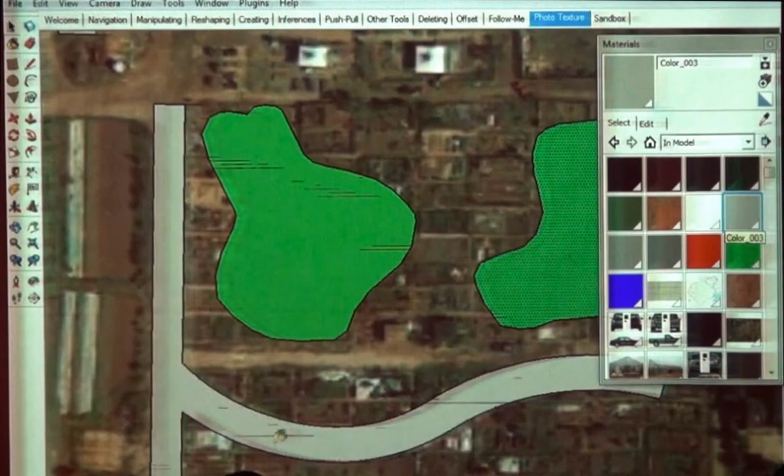If you guys—we talked about the blue-white thing—just to feed your anal retentiveness, to change that, to reverse those faces, you right-click and choose reverse face. So I'm going to be anal retentive here. In my materials, I'm going to choose green. This green can be our planting beds, and this gray can be our sidewalks or our paths.

And maybe even our paths are really, really sexy, and we've got some banding in here. Maybe a little kind of highlight here, some more banding, not evenly spaced—that really looks nice. And we'll put in, look at this, I even have a concrete texture. Well, here, let's actually do some concrete there. Ooh, not there, there. And then this brick here can be our bands and that.

Okay, so you have to do a cost estimate, and you need to figure out the amount of mulch and liner for your planting beds, and you need to figure out how much concrete and brick pavers you need. So I'm going to put this stuff all inside a group, so I make sure that it's separate from the rest of my model, because I'm almost positive I'm using at least some of these materials somewhere else.

So if I double click and go into this group, I can then right click on something and choose select all with the same material. And now I've selected pretty magically all of my, in this case, planting beds. Right click, entity info, shabam—there is my square footage.

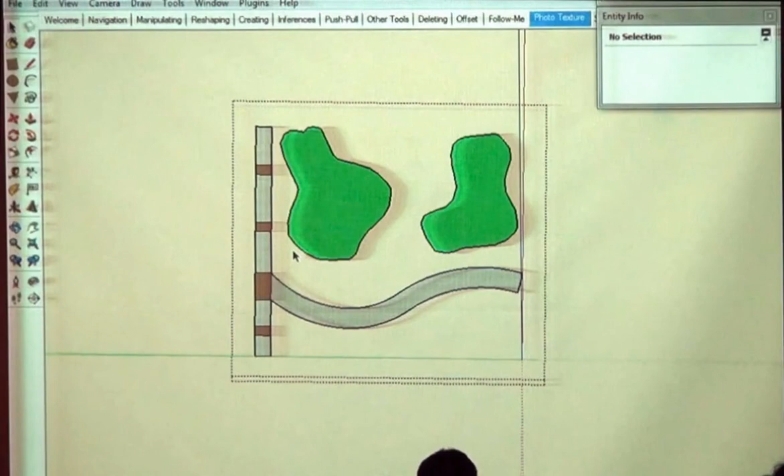So the trick is to make sure - because I know I'm using this concrete over on that other model - if I put it inside one group, it'll be isolated for when I do select by material. If I right click, these are easy. I could click on there and get my area.

But it's a little harder to select all of this concrete here. If I right click on one of the chunks, I can go select by material, or select all with same material, and you can see it selected all those chunks. Then if I pull up entity info, either underneath the window or by right clicking, it will show me the area right there. It'll also do it for length, but you have to select just edges then. Sometimes retaining walls get done by face, but anyway.

So when you're selecting everything that has the same material, what if you have like a sidewalk that's made of...

Yeah, so that's why I put all this stuff inside one group, so it would only select stuff inside this group when I went select all - because I know that I have this concrete used on that other model. Also, even if I had brick benches in here, if they were components or groups, they would not have gotten selected by this.

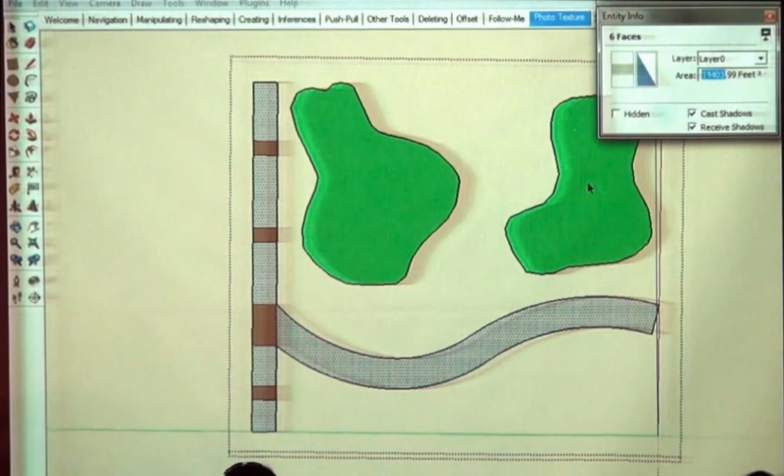So there's no easy way to change line weights? You can change them only universally. When I need to make something read bolder, I actually outline it. So if it's like a land-use-y, plan view kind of thing, I've done lots of plan view—let me show you one, in fact.

One of the pro features is this thing called Layout. It's a separate program that comes with it, like a page layout system for SketchUp, and it's actually pretty cool—a little cumbersome. I still think they need to give it some more love, but it's pretty useful.

So it lets you basically X-reference a SketchUp model right into a page space, so changes you make in SketchUp later get reflected instantly in that layout space. But that's a pro feature, so I don't want to harp on it too much.

Where was I? Nope, nope. Best work. Stills. Longmont, Alley.

As part of this project—hopefully a couple of you are familiar with it—this is the alley improvement project in Longmont behind Main Street. We did all this landscaping stuff, and these are helpful graphics to help decision makers understand what we're doing with these silly arches, which have been there forever as an art in public places thing, and it's a political nightmare.

Anyway, that was only part of it. The thing that was more important were actually these site plans—hopefully this is the right one. Oh my goodness, not the right one. Here we go. So these are all done in SketchUp too.

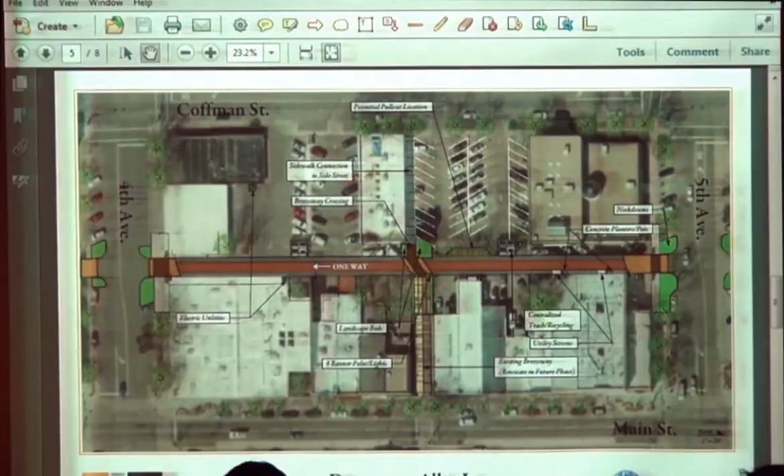Can you talk about—well, I don't know if you have more to say about this, please do—but can you talk about format, just talk about exporting to other programs and formats? Okay, what time is it? Okay, so we have, okay. Let me attack some of that stuff, and then we'll talk about the sandbox tools.

So that's how you make images. Underneath options, you can change—you can either have it be the exact number of pixels back here on your screen, or you can uncheck that and type in something.

There is a max. Even on my beefy monster computer at home, I've never gotten even really basic graphics to go much bigger than 5,000 pixels on a side. So 3 to 4 thousand is usually the high-end max, which is big enough for plotting—I plot stuff all the time using those scale images.

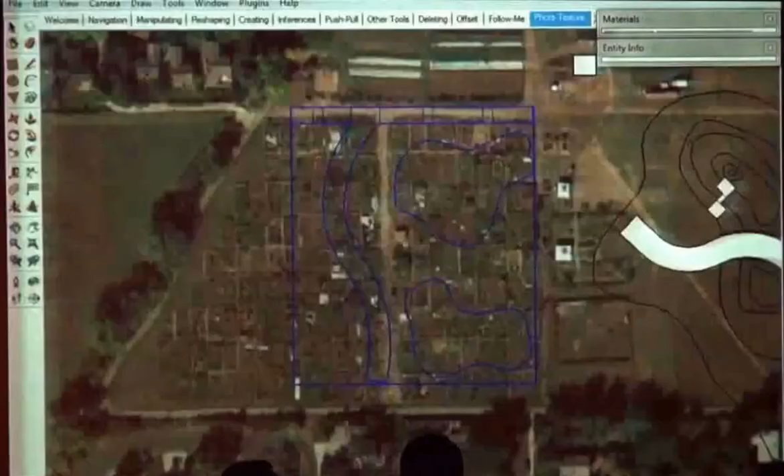Okay, so we're going to talk about sandbox tools. A couple things: you guys don't have Pro, so what I did is try to make what could be a CAD import. It would be something like this, except there would be some layers, which isn't relevant here. So here are some contour lines, here is a road you're trying to cut in, here are some retaining walls, and here's maybe some plaza. Maybe this is even flat, but we'll see.

So we have to turn this on. Not all of you probably have it turned on. If you go to Preferences, Window Preferences—on the Mac you're under SketchUp Preferences—go to Extensions, and make sure the sandbox tools is checked. First goal, make sure it's checked. Then underneath View, Toolbars, Sandbox Tools, or it just says Sandbox. So here, it's this little guy here.

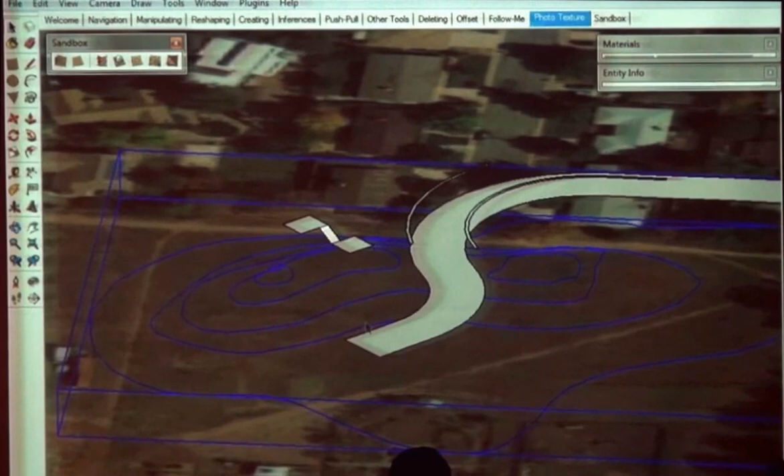So we have this set of contours, and we want to create a terrain. This is really useful for more than just terrains—if you want to make irregular shapes and you just have outlines of some key locations, the same thing applies. This is a group, so we have to double click into it. I turned on the sandbox, but that box didn't pop up—oh, you have to go to View, Tool Palette, and Sandbox. Yeah, you have to turn on that tool palette. View toolbars, and it should be towards the bottom somewhere.

You select these contours, and then press—there's two buttons here in the beginning. One's called From Contours, the other one's From Scratch. You press the From Contours button, and it stitches it together.

So all you need to do, for whoever just asked that, is select all of your contours. You have to go inside the group—you can't do it from a group. If I just select this whole group and click it, it says, hey, you don't have anything selected. So you go in there, select all this stuff, and then press the From Contours button, and it stitches it together.

So what this made is another group. If we go into it, it's a 3D surface—it's a tin. What it does is it just says, hey, I'm a vertice, where's my next closest vertice? Let's connect it. So it basically zigzags together. It's really stupid, the tool.

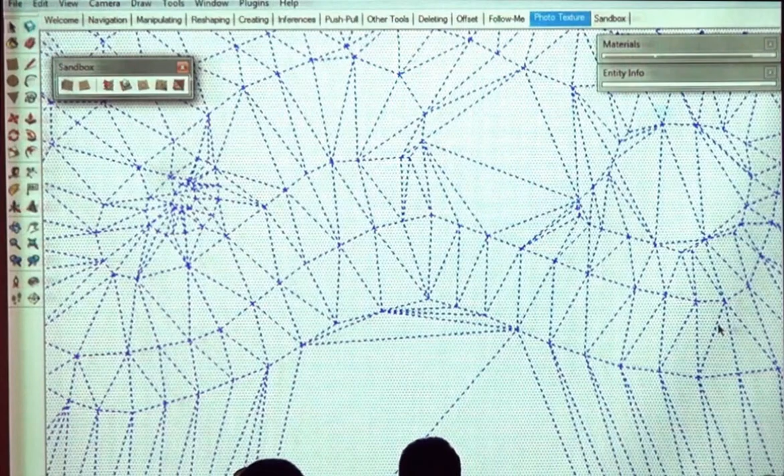If you just triple click on it, you can show these hidden lines. And you can see in some places it actually filled in on the outside—so that's the contour line there in blue, and it stitched on the outside. So there's sometimes some cleanup involved with these if that was wrong.

Wait, so I made it into a group and then I tried to use the sandbox tool—I know you can just set it. You go into the group and then do it. You don't need to make those contours another group.

Okay, let me back up for you. So I have these contours here. They are a group already, and I could either ungroup them, or go inside of that group and select all of them individually, and then press the From Contours button.

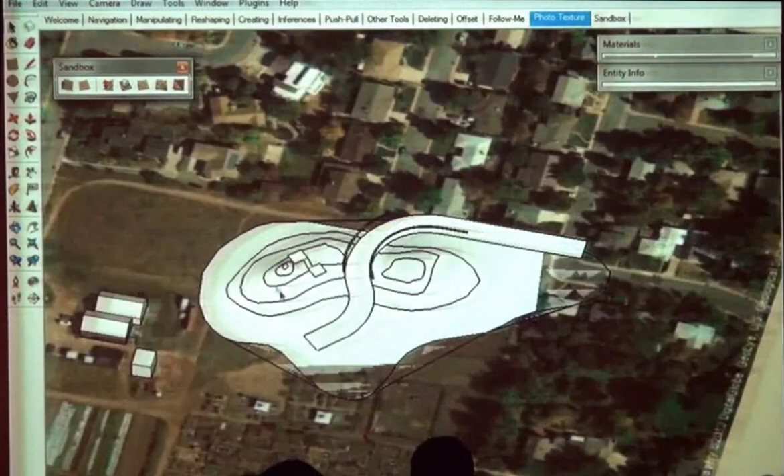Okay, so I have this group—let's explode this. Exploding is ungrouping; if you right-click on it, then we should have our contours, which we could either delete. Sometimes they're actually nice, depending on the style, so I'm going to leave them.

Question? Yeah. You don't have this toolbar? Yeah, well, the step before that—you just have to go into that group. No, like, I'm talking about...

Oh, so underneath Window, Preferences, Extensions, make sure that Sandbox Tools is checked. Okay, thank you for translating.

So it's not letting me select explode. Are you back out here in this whole model space? Yeah, so if you select it and right-click, explode's not an option there. It's not going to do a lot right now, because the hierarchy is one big group, and inside of it there are the loose contours individually, and then there's another group that is the terrain—the stitched together terrain TIN.

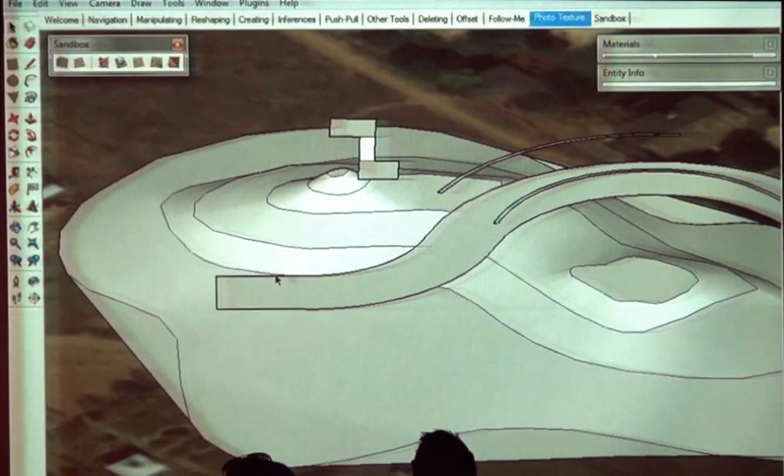Explode. Okay, so then I have these loose contours, and if I click on the surface again and choose explode, then they kind of all knit together. And this isn't bad—I kind of like the look. I think it helps read the landforms a little bit better, leaving those contour lines cut into it.

But if you dislike them, we can do something called softening to remove them, which we're going to talk about right now. So did everyone get back to this point? If you just explode that puppy twice, you should have the landform with the thin-edged contour lines cut into it.

So now this sounds insane—we're going to triple click on this thing and make it a group. There's a wonderful palette called Soften Edges underneath Window. Like you saw when I first triple clicked on this thing, there's all these little dotted lines that represent all of the individual triangles that make up this surface. This concept of softening removes those edges from the rendering process, because we want this landform to look softer.

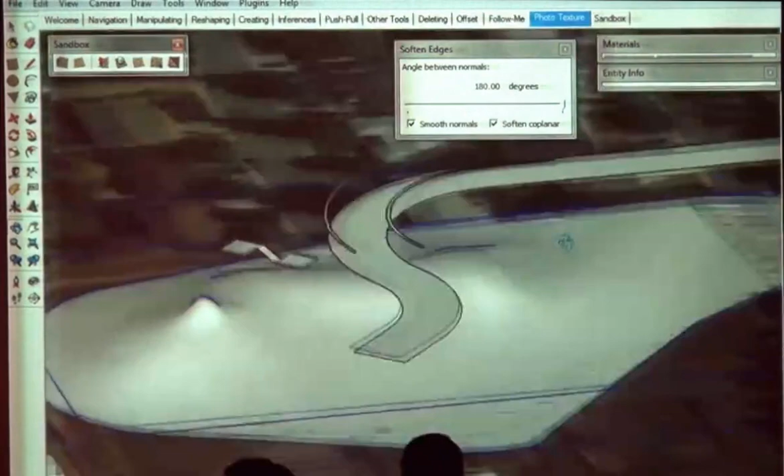It doesn't have these crisp edges that look jagged. So what we can do is just drag this bar, and it will remove as few or as many lines based on the angle between them as we want. And then there's a great checkbox here for Soften Coplanar, which if you move that up to 180 and click Soften Coplanar, it should be one smooth blob of terrain.

Conversely, if we're going for some kind of stylized look, we might want some of those soft lines, so we find some middle ground for that softening. But we don't want quite all of these—there's too many right here. We can use the erase tool to do them by hand.

If you look at the bottom, Control equals soften smooth. So if you hold down the Control key, this is one of the rare instances where your cursor doesn't change at all. But if you hold down Control and click and drag over these, it's not actually deleting them—if I were to delete them, I'd get a hole in my model. Instead it's softening out some of those lines individually. That's how you clean those things up by hand.

So these lines do a couple things. Let me make it into a complete blob here—smooth soften, all the way up. Okay, those lines do a couple things. In addition to being just a graphical element, they also help define different surfaces. So like when I was texturing that walk, it was one flat plane, but I said this chunk's going to be concrete, this band's going to be pavers, and so on. The same thing applies here—I can have lines cut onto this surface that get textured differently than other parts of that terrain model.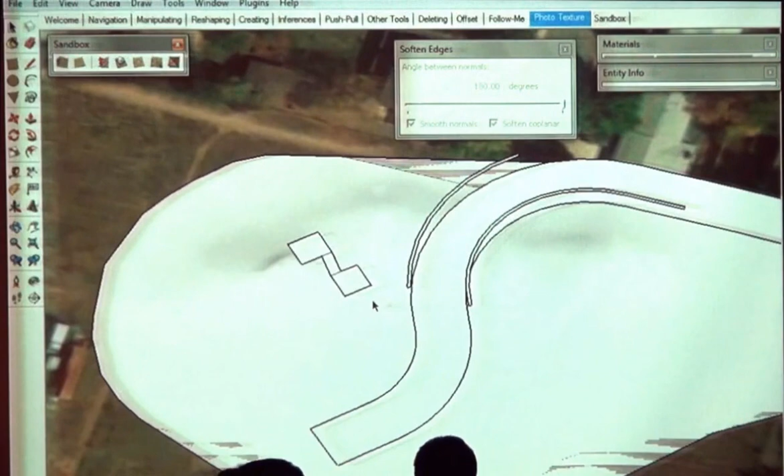So if I wanted this road that's getting cut in here not to necessarily be graded in, but just to be a different material that sits on top, you select that road, and there's a tool up here called Drape. Think about it like you're going to drape an air photo over this—we're going to drape this vector line work straight down over the top of this terrain. You select the element you want to cut into, use your Drape tool, hover over it, and it should auto-select the whole group—click again, and it cuts it onto that surface.

Huge note here: if you want SketchUp to crash, this is the step where that'll happen. Any of the sandbox tools basically, which is disappointing. But they're usually complicated—these lines getting cut into other things in complicated ways, with lots of triangles, and things just go wrong. Save before you do anything with the sandbox. It is absolutely the highest point at which things are going to crash.

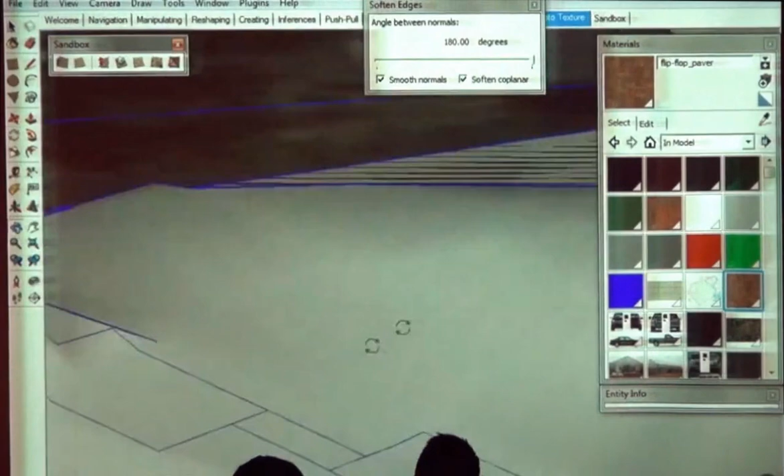Let's say that's exactly what this is. So I've designed this plaza, kind of thought about it, got my contours working on it. It's this two-tiered plaza, there's going to be some stairs in here, and I need this to not just be draped onto here, because this is insane—this is like a 2-to-1 slope here. That's totally unreasonable, it's certainly not ADA.

What I need to do is get this arrangement - I want this flat chunk, a slope where my stairs will be, and this other flat piece, but I don't want to use the word seamless because this is a pretty coarse way to do it, though it's a great start. I want this to be cut and sculpted. I want SketchUp to help me grade this shape into the land.

There's another tool up here called Stamp. If I select this group - it doesn't have to be a group, but in this case it is - and choose Stamp, there's this offset. If you look in the bottom right, there's a red line that is the offset. So there's this two-tiered thing, and what it does is flatten that out, then literally does an offset. That's the amount of horizontal space it uses to try to taper this terrain into the shape being forced into it, being stamped into the ground.

It'll make sense here in a second. So it's at 1, which is a pretty small amount. I'm going to type in, how about 10? 10's too big. 8, we'll try 8. Okay, I just typed 8, hit enter, and now I'm going to click on my terrain. Stamp will make things crash twice as often as Drape.

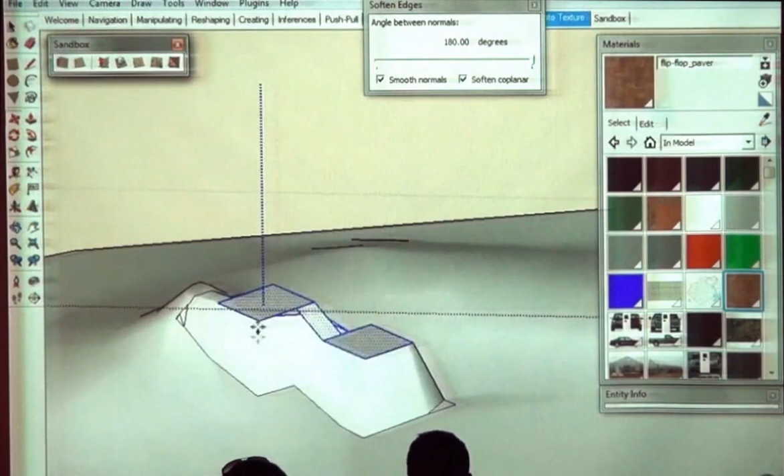So what it's doing then lets you kind of move this around. As a rule of thumb, I always like to just move this way high so it's hanging out by itself as a separate entity, because if it's tall like that, it's really easy for me to go back in, select that stuff, and move it around. This way I can actually use the move tool and snap to things - you can't snap with the stamp tool. So as a rule of thumb, I like to leave the stuff floating up in the sky so it's easy to select, then move it in specifically to where I want it to go.

And there's always little tidbits like this. I wanted this ramp here, so some of this stuff I need to delete, and I need to either draw in these lines. There's only a couple here, so maybe I can just re-triangulate it - that just took one, erase that guy, just takes another. In some places where it's more complicated, like here, there's a few lines. If you get a whole bunch of that stuff, think about using the From Contours tool as a stitcher, as a little seamstress.

If I select just the outline of the gaping hole in my terrain - let me deselect that first - I can choose From Contours, and it will fill that in. Now it's a group, so I just have to go explode, and I got it stitched in there. I can still see that we've flattened out one of the parts, but that saved me at least a couple minutes. If I was missing a whole side of this, that's definitely how I'd go about doing it.

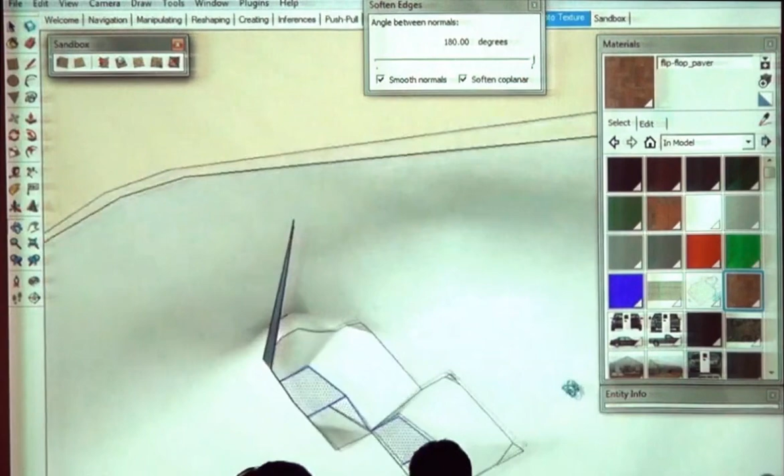So then I can select the top of this thing, use my move tool, be really specific and get it. I missed something, we'll have to clean that up. Get it really specific to where I want. Erase some of this insanity, see what needs to be... This is not a one-tool-to-rule-them-all kind of thing. This is definitely a stepped process.

Let me try to fix it. Let me just use the... Oops. Okay, that one needs even a little more love.

But so that's the concept about how to merge in something really specific, proposed grading for example, into an existing location. I use this all the time for even large projects, and save regularly. It looks like I slid it over to the side - that's part of the problem.

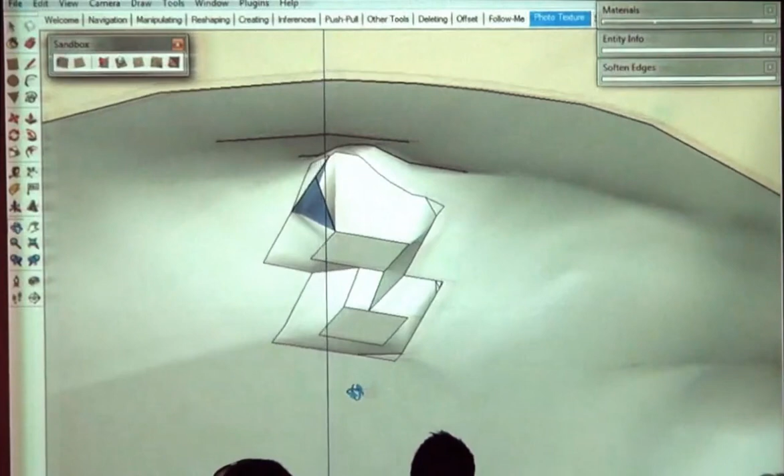So those are really the two tools that you use, and you just have to use them iteratively to accomplish something. Now, clearly, either I need to lay this earth back farther so it's not so steep, or I need to put in something like a retaining wall. Retaining walls get tough.

One of the methods that I would do - let's pretend I am stamping this road in. I'm actually going to put a flat road into this fairly undulating terrain. The first goal, I think, is to cut in my retaining walls and delete them - these are just going to be some holes that I'm cutting into the ground. And then I'm going to use my stamp tool, something small like 1 foot, something less than the width of my retaining wall generally. Watch it crash.

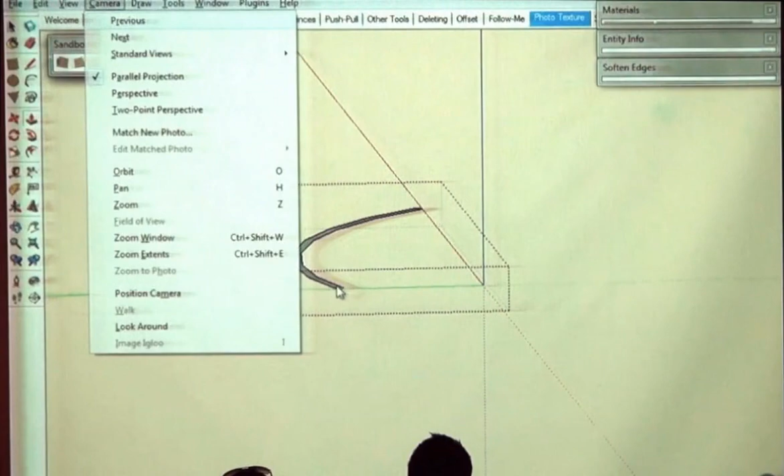And we'll put this, I don't know, somewhere, maybe like there. And then I still have these puppies - I can make the walls. Oops, I have no idea.

But I start to then, now clearly they need to not all be the uniform height, but that's how you can start to more specifically carve in walls into a stamped condition, I guess. Was that just crazy?

I meant like, did you guys follow that? Not like, am I amazing? I'm not looking for kudos.

Those are the concepts. If you have, there's just so many. I struggled to think of some real crisp, simple examples. This is as simple as I could make it, and there are 1,000 variations on all of that.

If there's something specific maybe you'd like me to demo that's going to be relevant to this project. Does SketchUp still have the perspective feature where you can have a background image that you know you're going to use to render contextually? Yeah, there's something called Match Photo, and they do have it, and it is useful.

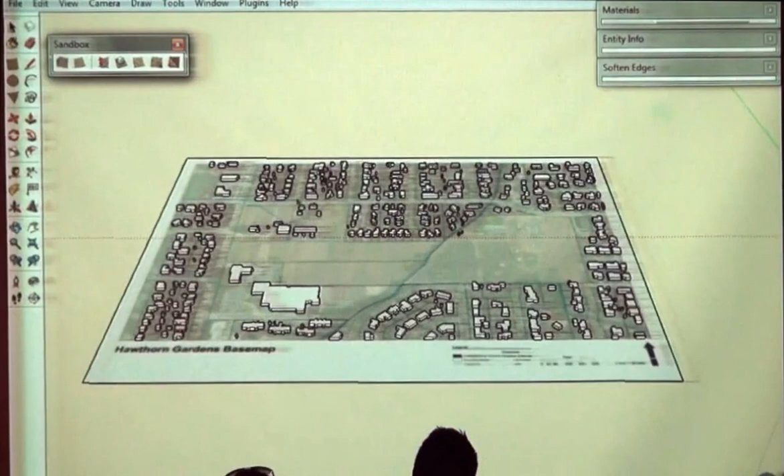In that same folder, there should be another one called 02 Google Maps. Oh, I can't believe we didn't - okay, so what I did: there's this base map that got sent along to me that's going to be part of this project, I assume, and it has a scale on it, and it's got an air photo kind of faded behind it.

Hopefully the scale is right. We'll scale it. We're going to bring in an actual air photo to be our base because this one is a little grainy, and then this is going to be just something that's referenced that sits on top of it and maybe gets hidden at the end of the day.

But here's the process to bring in resources from Google Maps. So underneath View Toolbars, you should find Google - should be this small little palette.

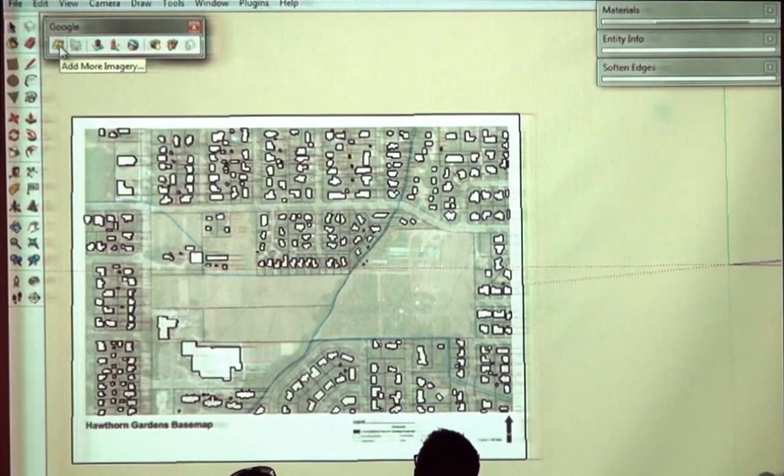And this is super easy. Add more imagery, the very first one on the left. And if you're on the internet, you should get this - I think it's just because it was where I searched last. So you'll be zoomed way out here. You're going to have to type in Boulder, maybe, and then navigate yourself up. If you don't know where the site is, it's sort of halfway up towards North Broadway, and there's generally the site. So there's a couple of tidbits here.

This little Add Imagery utility remembers - every time you come back to it - the first tile that you bring in. It only brings things in at screen resolution, and it brings in this little Google thing and some terms of use stuff.

So having done about a million of these, there are a couple practical tips. This is too low res to be useful - this is actually less resolution than the image we already have in there. So really our goal is we want to bring in something maybe not like this, but maybe at that scale, though certainly much smaller than the whole study area.

So what you do is zoom into a chunk at what you think is the resolution you want, then choose Select Region and stretch this out to the full window. Be a little anal retentive about it and get it in there, because we're going to tile together a series of these. And as soon as you get it stretched out, choose Grab.

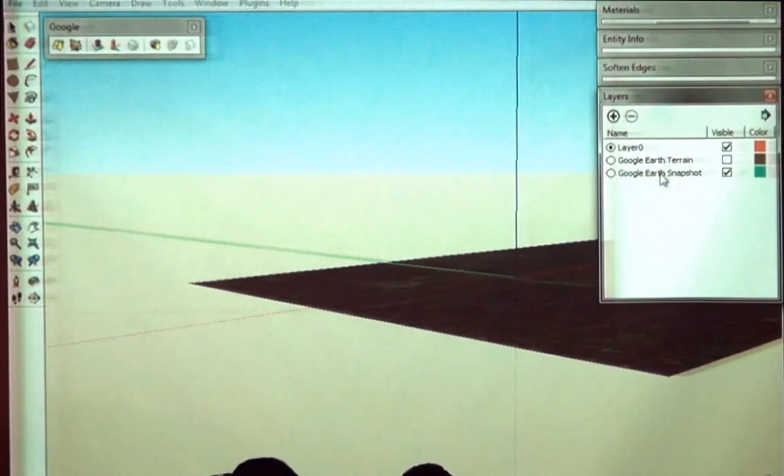It brings in two. So you can see that when I just press this, it's just toggling the visibility between the snapshot and the terrain.

If this was my project, I would probably ignore the fact that there's any slope across it because it's so minor, from a visualization perspective. My goal would be to delete the terrain part. I don't need that. So I'm going to turn on the terrain one.

I'm going to select this group, right-click, and go unlock. Whenever something is outlined in red like this, by default it's because it's locked. So if you right-click on it, you can unlock and then delete. Same with these guys—select all of those, unlock, delete.

Then I can toggle back, and if I want to really delete these layers, you can select them and press this little minus, and you get this really wonderful dialog box that gives you some options. I'm trying to delete these two layers. I can move the contents to the default layer, move them to the current layer—which is what this radio button indicates, they're both the same at current—or delete the contents altogether. I'm just going to move the contents to the default layer, layer 0.

We didn't talk about layers, so maybe I should take this opportunity. Let's grab a tree maybe.

Window, components. I'm just going to type in tree to search the 3D Warehouse. Here's a great learning lesson: there's going to be a ton of 3D trees. Some of them will be good, and others will just destroy your scene. This one, for example, is a bad tree—I don't even know how many polygons there are in this thing. The ones that have individual leaves like this are bad. Your computer is going to be able to handle a dozen, maybe, if it's fast. Don't use this type of tree.

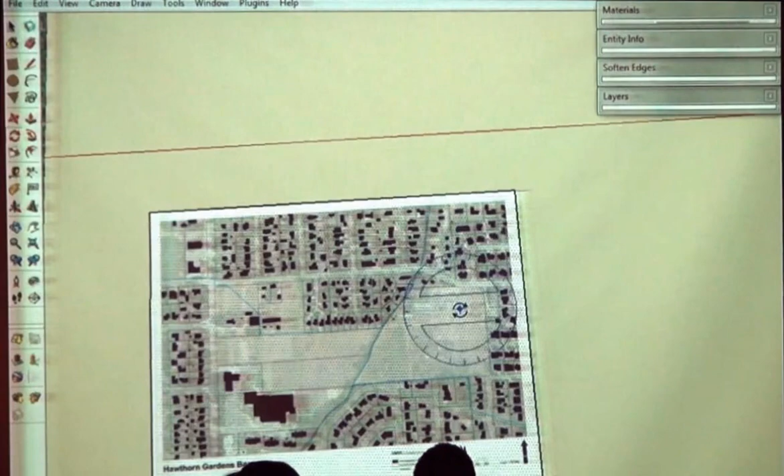And stick this puppy in here. We'll scale it up that big. We'll use our line tool, and cut off the unnecessary part. And we'll make it a group. So now we have this group.

A couple things. This has a graphic scale on it, so I'm going to assume that's right, and double-click on this thing. We can do some magic. So we could measure this. Currently the distance is like 202 feet in my model, and it needs to become 320. I could get out my calculator and figure out the scale percentage, but that sucks. Math sucks.

So you can actually use your tape measure tool to do that scaling for you. The concept is you measure a distance, and then tell SketchUp what you actually want that distance to become. The one caveat is because I have this air photo in here, I don't want to screw up the scale of the air photo. I only want to affect this one image. So to do that, you have to make sure it's a group, and use the tape measure inside the group, so its changes are limited to just this group.

So tape measure, click there, and now I'm going to type in 320 feet, enter. This box will come up every time: do you want to resize the active group or component? If I did this outside the group, it would ask if you want to resize the whole model, and you'd be changing things that were previously correct. So you want to make sure it says active group or component.

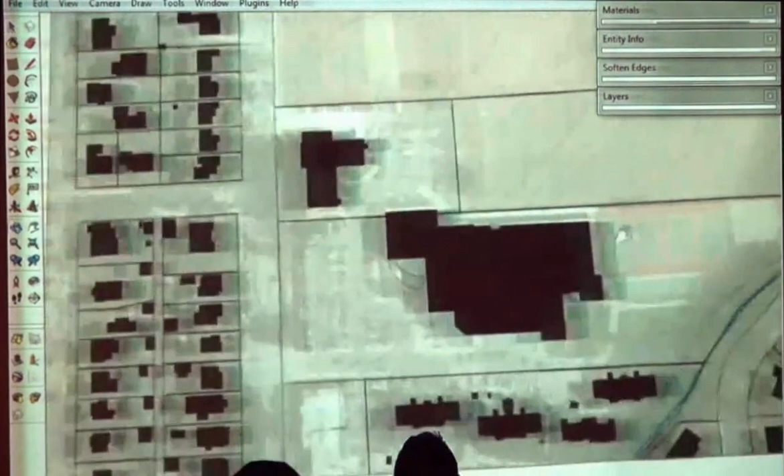Hit yes. Now if I draw another line, I can just double check. This one, you guys can't see it because it's at the very bottom of my screen, but it says 320. So now let's see, where are some real visible elements? The tennis courts are probably a good one, maybe even this little crossbar on it. We can't quite see it here because I brought this in too low, but it's about there-ish. Let's get rid of these trees.

And then somewhere on the other side, the greenhouses. Let's just do the greenhouse. So here's that corner of the greenhouse. The distance from the tennis court crossbar to the opposite corner of the greenhouse is just shy of 1,300 feet. So hopefully that's what this is. If we go from here, is it from the opposite corner? Yeah. So if we go from here to here...

It's actually not. Is the scale off on this by chance?

Okay, good. Thank you.

But that's okay, we already know that. So this is wrong, we'll just cross that out. But this is even more the reason why we did this - this is correct. This is really worth taking to the bank.

So we know that same distance now needs to become - we'll just do it again. We'll use our tape measure, snap to the tennis court and that line, and go 1,300 feet. Enter, yes, we want to resize it. And now we'll come in here, grab you, and stick it right there.

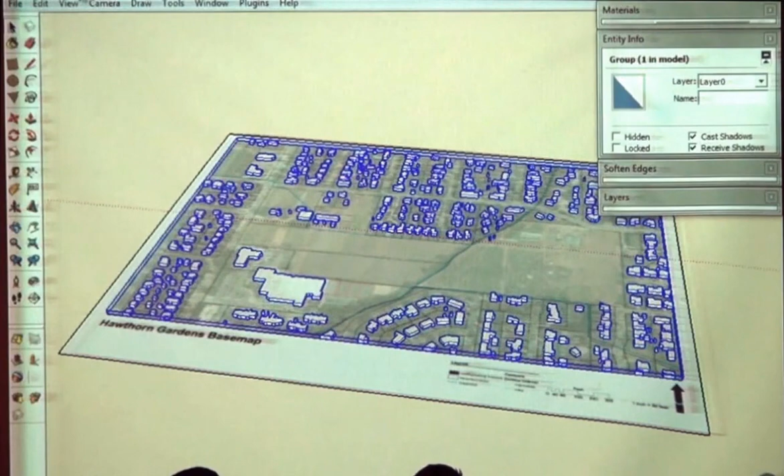So I'm going to copy this. This isn't going to come into place because I've changed everything. But if you just go up here - edit, copy, paste, just Control C, Control V, like literally everything else - and then go paste. There is paste in place, but it's not relevant for this. And we'll stick it in here.

So it looks like we had to scale that too. So scale maybe to this guy - 1577, go into this group. Oops. 1577 feet, enter, yes.

Pretty close. So that's how you can kind of put that base together.

I then would make some scene tabs that maybe show and hide some different geometry. I like to have kind of like a working one, so there are a couple things going on here. We need to unlock all this air photo stuff - unlock so that we can hide it. We can't hide it otherwise.

So the scene tabs we haven't talked about - well, how much time do we have? No time? Is class really over at 11? Or is that when I get kicked out of here? That's when I think, that's when I need to take my section.

Okay, last thing I was going to talk about then is styles and scene tabs. So scene tabs, the most abbreviated version I can do this in the world - scenes are those little things we were using before. Before, we just had it memorize the camera location, but it also can remember things like hidden geometry and what layers are showing. So if I wanted to have one where it's just air photo, I can hide this.